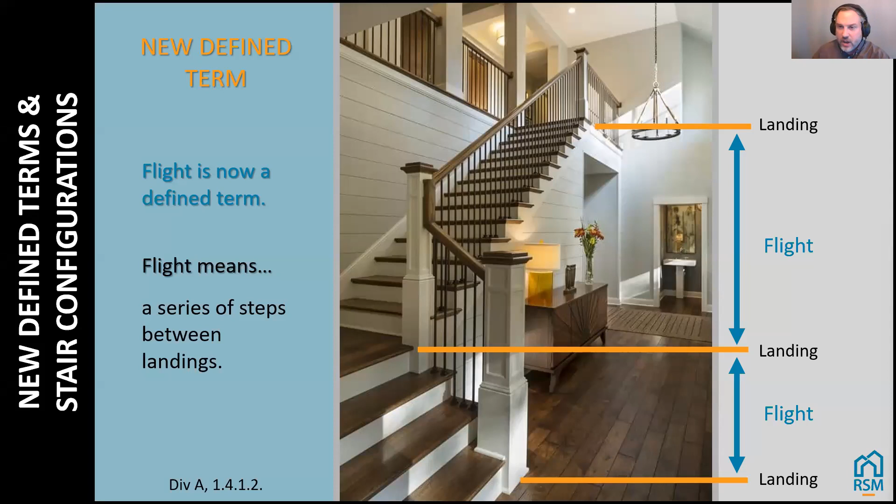So this was a really good clarification in the building code that talks about what is a flight. It clarifies that when we're dealing with these specific flights, we don't have to have uniformity through this entire stair system - it has to be to the flight. So that was a good change, and now we have a defined term for flight.

So what are these new terms? Well, flight is now a defined term, so it hasn't really changed, it's just given us some clarification. We now have a new defined term.

We don't use the word angled tread anymore. It's gone. We used to use that word, so I've got to throw that out. And now we use tapered tread. The building code no longer uses angled tread, it now has this term called tapered tread, and it does have a definition: it is a tread with a non-parallel edge that increases or decreases over its run uniformly over its width.

So in this case, when you're using a circular type stair, you're going to need to use tapered treads to achieve that - essentially you have a smaller run on the inside than you have on the outside. So we no longer call that an angled tread, we now call it a tapered tread.

One of the things you'll notice is that it has to be a uniform change over its width. So I know we love live edge stairs and they look beautiful, but if you tried to use a live edge stair, you would have a difference of width, but it wouldn't be uniform - it's going in and out. In this case, the code is clear: it has to decrease uniformly over its width. That's a tapered tread.

The other thing it's done is set up different configurations of what stairs shall consist of. Previously, the code talked about a straight run. Well, now it talks about a straight flight, which brings it in line with that defined term of a flight. So if you had the first diagram with two flights, your first configuration would be a straight flight.

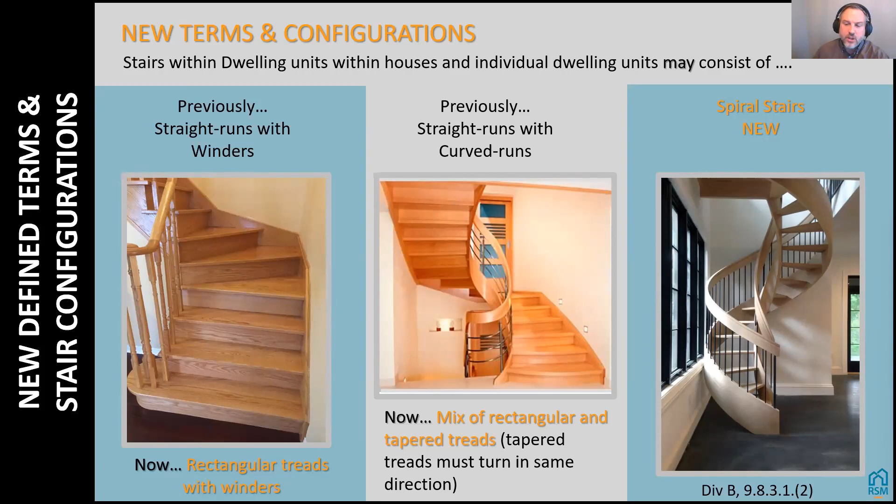Well, now it has changed. It says you can now use a mix of rectangular and tapered treads, but the tapered treads must turn in the same direction. So we've all been doing this in the past, we're just changing our terminology on how we talk about a stair when we're really dealing with code compliance. And a dwelling unit is now permitted to have a spiral stair, but there are some restrictions on that particular type of stair. So those have had some configuration changes with regards to the names.

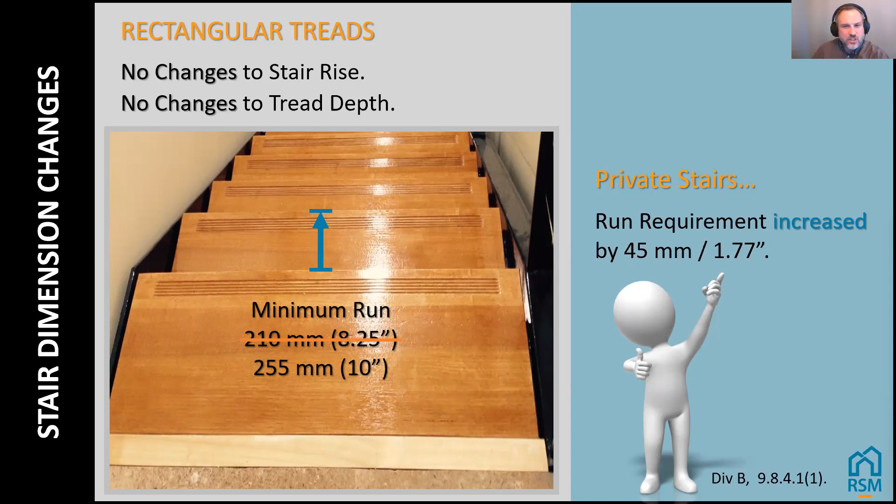Now, there's been no changes to the stair rise. There's been no specific changes to tread depth, but I'd like to bring up another slide just to clarify it, because I know a lot of times people get a little bit confused on the requirements of the code.

So we could have an 11-inch tread, which is probably what most stairs will have these days, because most stair configurations love to have that 1-inch stair nosing. But again, the 10-inch is the distance between nosing to nosing. The nosing requirement of 1 inch has not changed, so you want to make sure you're adding this additional 1.77 inches to any type of stair you're typically doing. But if you have a stair that does not have a nosing, it would be slightly different. So make sure that when you're talking about full tread depth, you understand the requirements of a nosing.

So those were our rectangular treads. Very easy. Well, what happens when we get our tapered treads? We don't call it an angled tread anymore, we call it a tapered tread. Now on tapered treads, it's the same thing: no stair rise changes, the tread depth is the same, and no changes to the minimum run, which is 150 millimeters. However, run's the same as a rectangular tread, but you measure it 300 millimeters or 12 inches from the inside of the handrail.

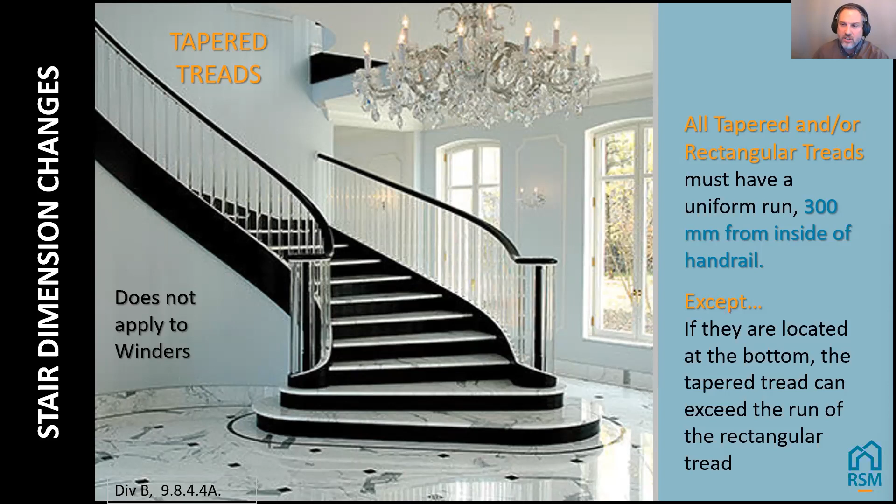Added basically a slide to say what winders was before is what winders is again. They did not touch the requirements of winders in the building code, so we still have that maximum 3 steps, blah blah blah blah. Same sort of information with regards to winders.

So those are big changes, especially that 10 inches. That's a huge change that you want to make sure you're dealing with. So designers, get your stairs designed, change your applicable standard notes on your drawings, and of course make sure you've provided enough room on the floor plate for this new stair.

There were also some changes with regards to landings, which is also going to increase the size of your floor plate, depending on the configuration of stair you're doing. Building code previously had a table that talked about how the angle of the stair changed and applied to the size of the landing. But essentially what the building code has done now is eliminate it and make one rule. If you have a 90-degree change at the landing, it's the same as before. This is really the rule they're following: it has to be the minimum width of the stair, what it needs to be. So bang, 90-degree change, same as it was before.

However, prior to this, on a straight landing, you were able to reduce it to like 860 on an interior stair, but not anymore. Building code requires that 1100, the lesser of the minimum width, or 1100 for that particular landing. And that does also apply to the 90-degree. We've got to ensure we have a larger landing, so they've increased the sizes of the landings. We don't get too many of these straight landings in the standard typical house, so you may not see this as applicable unless you're dealing with 9, 10, 11, 12-foot ceilings.

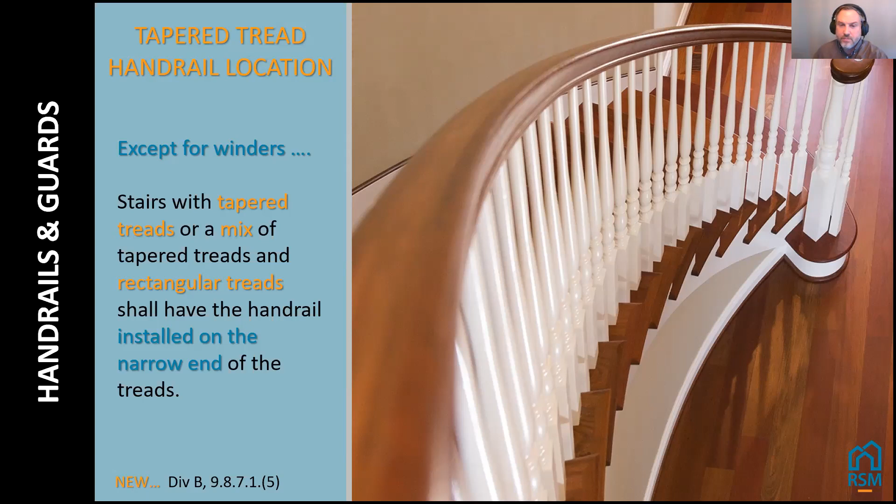One big change we've always been used to is that the height of the handrail has now been changed. If you're with a stair company, you're probably pretty excited about this, because we always had the guard height at 1,070 millimeters, but the handrail couldn't be any higher than 965. That made for some interesting details with regards to installing a handrail that's also a guard—you usually had that gooseneck at the top—but now the building code has changed so that a handrail can go as high as 1,070.

Of course, the minimum has not changed. So this gives you a little more flexibility now in using the guard as a handrail, without massive changes in height due to the configuration. Of course, this doesn't apply to spiral stairs, which have their own requirements, but this will apply to most stairs we're going to be dealing with.

Small change, but one that might be a pain. We're all used to the 2 inches, or 50 millimeters, between the inside of a handrail and the surface of a wall. Well, the code has changed to 60 millimeters if the surface is rough or abrasive.

So again, we all love gray areas. I think the idea here is, what is rough? Is a brick wall rough? I'd say yes. Is a stucco wall rough? I'd say yes. But sometimes we get situations where it's unclear what counts as rough.

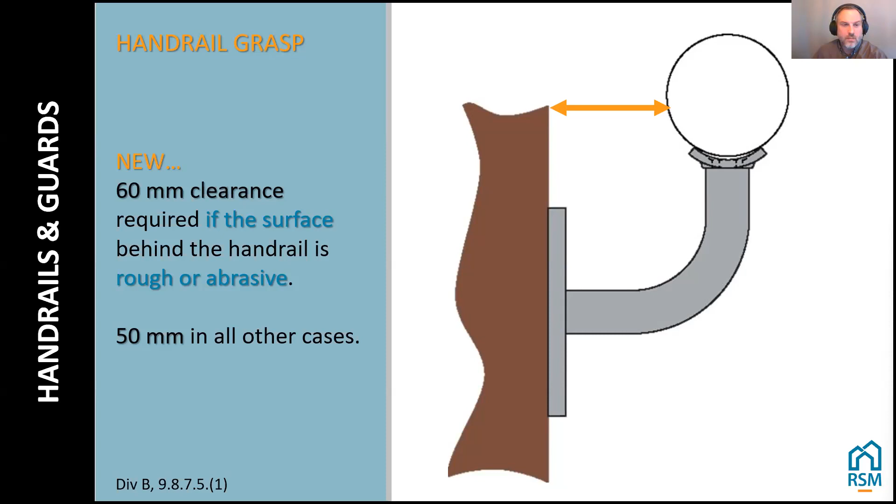Previously in the building code, it wasn't very clear that the prescriptive requirements for how to attach a handrail were also applicable to the exterior of a building. When we have handrails inside the building, the code is very clear on where you have the attachment points, where you attach it, what type of screws—all that was in the building code. But it didn't clarify that it was for exterior, so there were some discrepancies—some were enforcing it, some were not. But the code has now made it very clear that the attachment requirements for handrails are also applicable to exterior handrails.

This was an interesting change that was completely revoked from the building code. It talked about how, if you had a stair with more than 2 risers, the sides of the stair, ramp, or landing around the stairwell shall be protected by guards if not protected by a wall. The idea here is, wait a minute, isn't 600 millimeters typically the height that requires a guard—but this needs it at 400? It just doesn't seem right. So the building code has taken this particular provision out. It must not have been in the national building code. So again, we're just following that 600 millimeter threshold now—we don't have this special provision that forces it on a stair that's more than 400 millimeters or 2 risers.

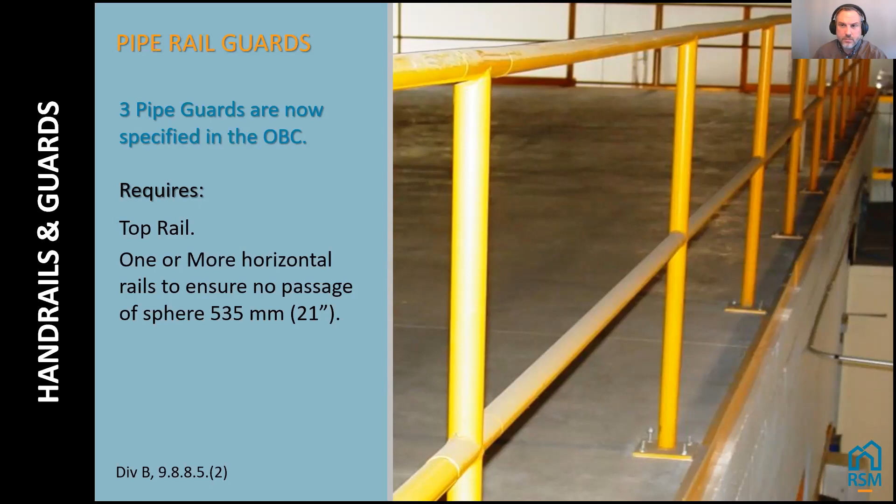So that's the particular presentation that I have. That's all the changes that are in Part 9 of the building code. We've talked about the new defined terms—why, what, when, and where—stair dimension changes, landings, handrails, and guards.

We do our best here at RSM Building Consultants to provide you the best information that we know how, and we do that by providing you our opinions on these particular code provisions. But make sure you double check with your municipality as you start working through these issues, because the chief building official in the municipality is the authority having jurisdiction. You want to make sure that anything you're discussing with them is also on the up and up.

Do we have any questions on some of these provisions that we've talked about today? You see one in the Q&A session there, Gerald. I think I was going to have Tara moderate some of the questions here for us, so if Tara's still around, then...

Yeah, I see there's one on here—are we able to get a copy of this presentation? For sure, I have a PDF copy of this particular presentation. I'll be sending it off to Dieter and his team, and I'm sure they'll be able to share this with you, because we went through it a little bit fast, step by step. You probably want to sit down and look over these changes, so we'll make sure you get a copy for your notes.

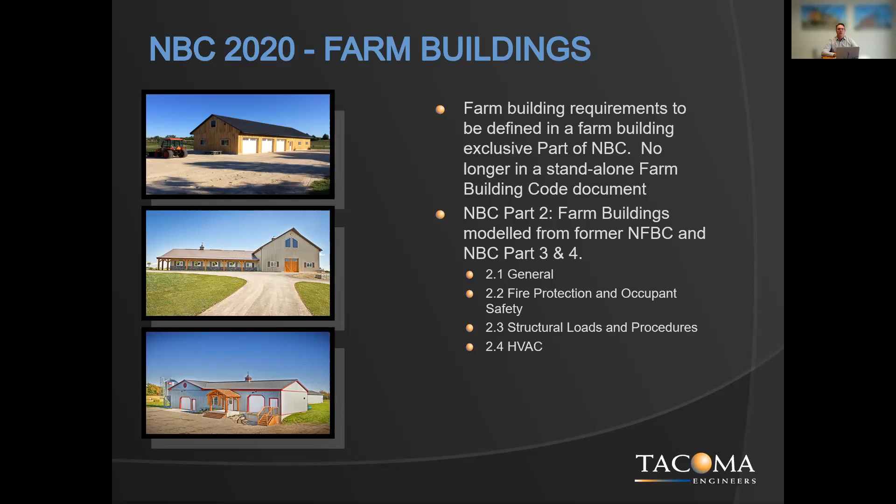Within Part 2, it will be broken into 4 parts: a general section, a section on fire protection and occupant safety very much like Part 3, a section on structural loads and procedures very much like Part 4, and HVAC very much like Part 6. I believe that's correct - not my specific area of expertise, but certainly this new Part 2 was modeled after the former National Farm Building Code, plus NBC Part 3 and Part 4.

One of the prime differences between the NBC general requirements and those for farm buildings is that only the safety objectives apply to farm buildings - the property objectives do not apply. As every single clause in the new code was written, drafted, and reviewed, a reference back to objectives and function statements was absolutely required. So you will see some changes as we move forward here that are specific and changed because of the objective statements.

Going through NBC Part 2, very much like the old code, this only applies to farm buildings of low human occupancy and those located on farmland, which means that greenhouses or other farm structures in an urban environment are not farm buildings. Also, industrial facilities located on farmland are not farm buildings - they need to look like farm buildings and operate as farm buildings.

Within those farm buildings, they're broken down into four categories or divisions. The G1 high hazard farm buildings, G2 a standard farm building, G3 specific to greenhouses, and G4 may be a bit of an oxymoron, but it's a building with no human occupancy. That really gets into some of the storage facilities that are typical on farms.

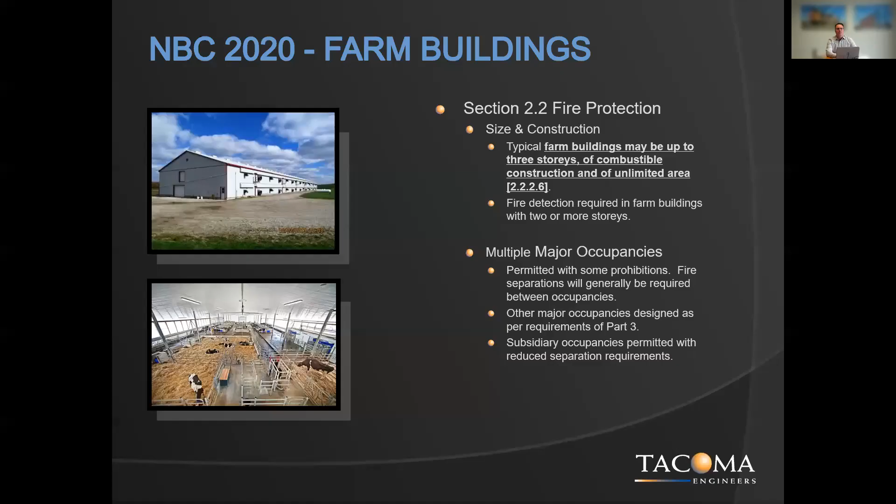In terms of fire protection, as we alluded to earlier, fire department access is required at all farm buildings, as is emergency lighting with backup power. Exits also now need to be clearly identified or signed, and overhead doors are no longer allowed as defined exits.

Very much similar to previous editions of the Farm Building Code, fire separations are required between many high hazard areas. But in the attics, the spacing of attic fire blocks is no longer based on a linear measure, but areas.

We then also will get into ventilation requirements, and one contentious issue, and may be subject to revision moving forward, is that all of the spatial separation requirements have been removed from the code because the only objective statements that could be applied to those were the property and not the safety. That is open for debate, I recognize, and I can tell you that there are probably some changes coming in the future.

In terms of structural design, very much as per the previous codes, but it's been greatly simplified. The underlying statement is that farms are designed as per Part 4, with the exception of the specific requirements listed here and throughout the code.

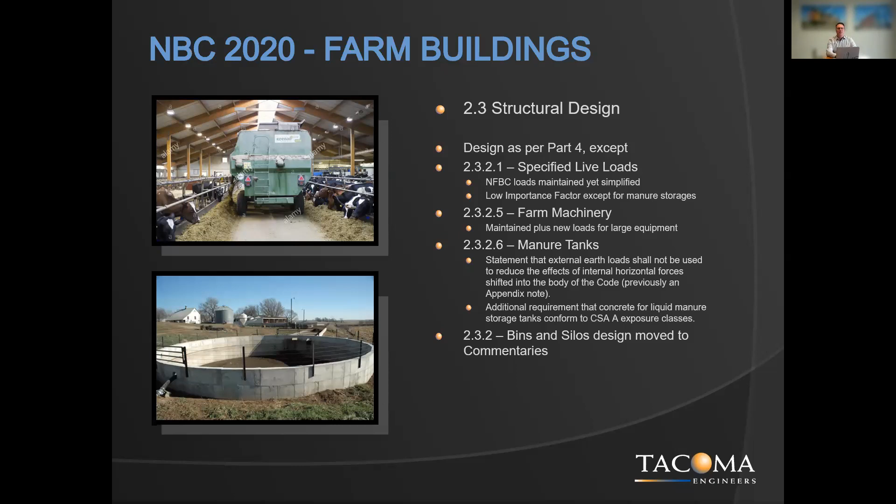Increased loads for large farm machinery, discussions about manure tanks, bins and silos have been removed out into the structural commentary. I recognize I'm going through this very quickly. It's a bit of a repeat for many of you. I'm happy to answer questions at any time as we move forward.

The concept of snow design has been maintained from the previous version of the codes, but it has moved now to a 50-year return period, and the system factor for trusses has been removed. Essentially, that means we're going to be seeing trusses installed at 2 feet on center rather than 4 feet on center. That came directly from the Canadian Standards Association recommendation.

There's also been some updates about roof snow loads on greenhouses, a slight increase, but also a requirement that there's a minimum heating that can maintain 10 degrees centigrade in the building with full backup power.

The wind loads are one of the biggest structural changes. We're going from a 1 in 10 year to a 1 in 50 year return period. That's about a 50% increase in the wind load that the farm buildings need to resist. That's a reflection of climate change, also some localized failures we've seen with some of the extreme weather on wind.

Seismic is another item that has bounced back and forth many, many times. Some advocated that the status quo of no seismic design apply to farm buildings. Others wanted all buildings subject to seismic design. In the end, a hybrid solution was developed, that the default is that seismic design is required, but there's 2 major exceptions.

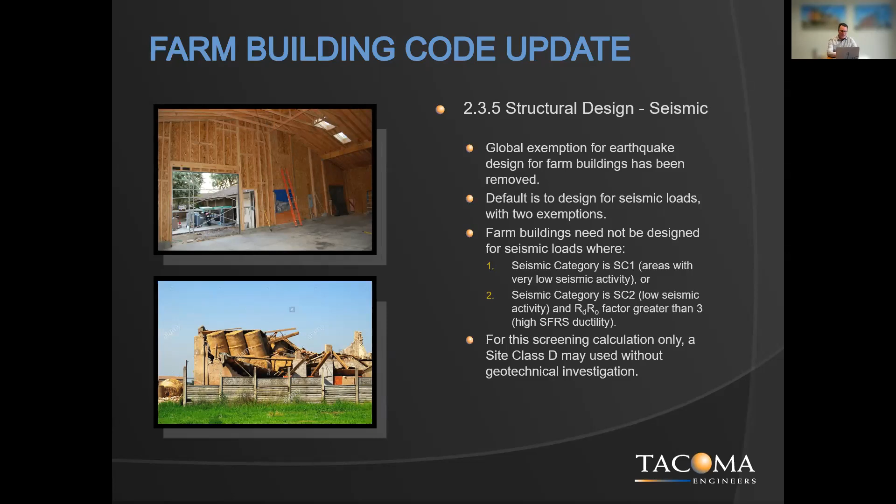Final few things on structural design. The importance factor will be maintained at 0.8, recognizing low human occupancy, but allowable stress design really hasn't been used much since the 90s. It has actually been now removed from code. Also, the old National Farm Building Code had specific load testing criteria.

That has been removed, and any load testing required needs to be done as per the CSA standards. One of the last items here is ventilation. As I mentioned, high hazard farm buildings are a special category, and any barn with manure storage below the floor is considered a high hazard farm building. But with this requirement, 2.4 on ventilation introduced, those buildings actually get their criteria reduced down to what's equivalent to a regular farm building. So there will be mandated 2 air exchanges per hour.

All of those liquid manure storages will need to be ventilated with the appropriate design criteria. Silos, feed bunks, those items have been removed specifically from the National Building Code and introduced into the structural commentaries. And many of those, in fact, now reference American standards because unfortunately, with cutbacks, there is little to no original research being done in Canada. So it was best to rely on the American standards that are updated on a regular basis.

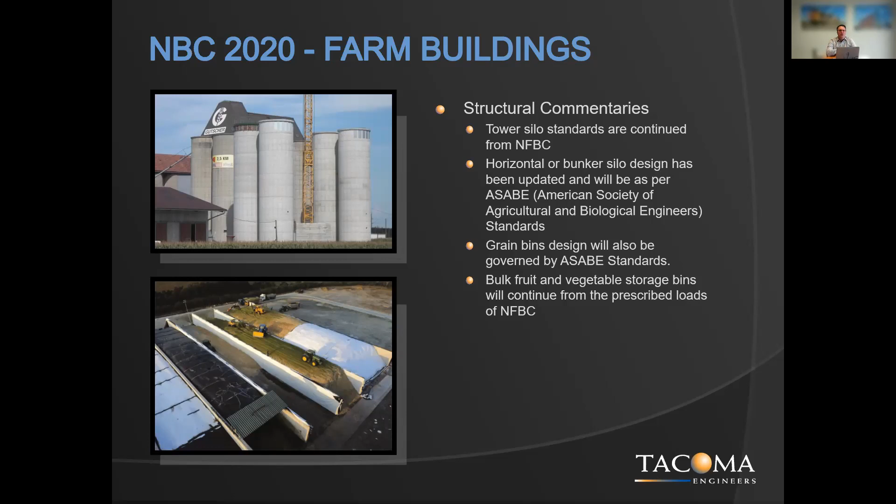That was the building code. Now to the fire code. Most people on this, yes. Sorry, we do have a question in the Q&A, so if we could just maybe look at that before we move along.

The question comes from Mark Diebel. Will the change to farm buildings being designed to Part 4 mean that all farm buildings, regardless of size, will require a P-Eng stamp? My apologies, it may have been in the notes earlier. This only applies to large farm buildings, and that definition uses the definition from the balance of the code, essentially 600 square meters. I will get to small farm buildings as a small comment at the end, but all my previous comments were with respect to large farm buildings, 600 square meters and bigger.

And we had one other question pop up here from Jonathan DeWord. Will there be changes to the standards for stave silos? All of the silo design will be as per the ASABE standards. So yes, there will be, recognizing that these are generally designed by the manufacturers with specialty engineers. They will be, and most of them actually have been relying on the ASABE standards. So I don't expect to see significant changes, but the new standards will be the American standards.

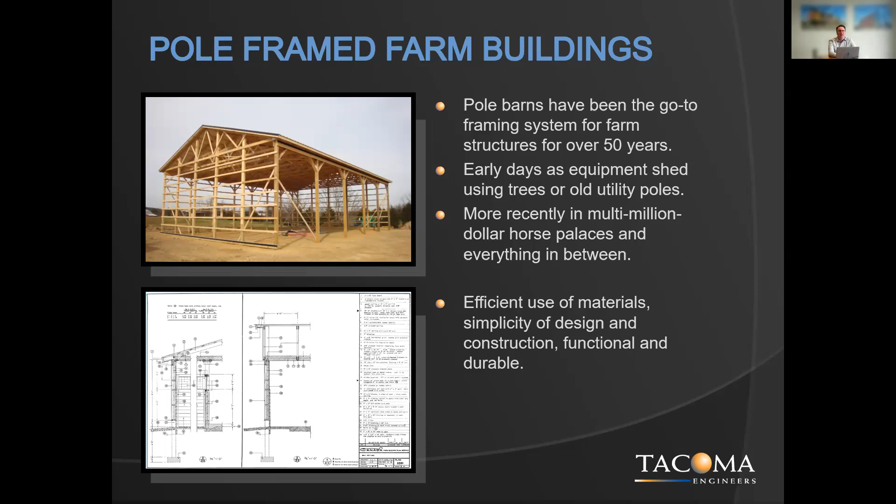Really, the pole frame building has been very well received. It represents a really efficient use of materials, simplicity of design and construction, functionality, and there was always an assumption of high durability. The drawing at the bottom was a Canada Plan Service drawing from the early 70s, and with the exception of a few nuanced changes, that building design is as applicable today as it was in 1972 when Canada Plan Service put that drawing out there. Unfortunately, in the last few years, there have been increasing concerns about the durability of wood posts.

We've had stories of posts in particular rotting out sooner than expected. This was an article in Better Farming magazine by Becky Dumais in February, distributed to about 40,000 members of the Ontario Federation of Agriculture. So I think the message is getting out there, questioning some of the durability issues. It's a subject that all of us need to address, be it builders, designers, specifiers, and building officials.

Much of this started after a local builder reached out to me and the industry associations. He was called out to a farm where the farmer assumed two posts in the corner were subject to frost jacking and had lifted, binding all the doors. On further investigation, it was found that corner wasn't heaving, it was the balance of the posts on the barn that had settled two inches. When digging them up, this is what he found: complete rot through on many of the posts after only 12 years. In this case, these 6x8 posts had full penetration decay.

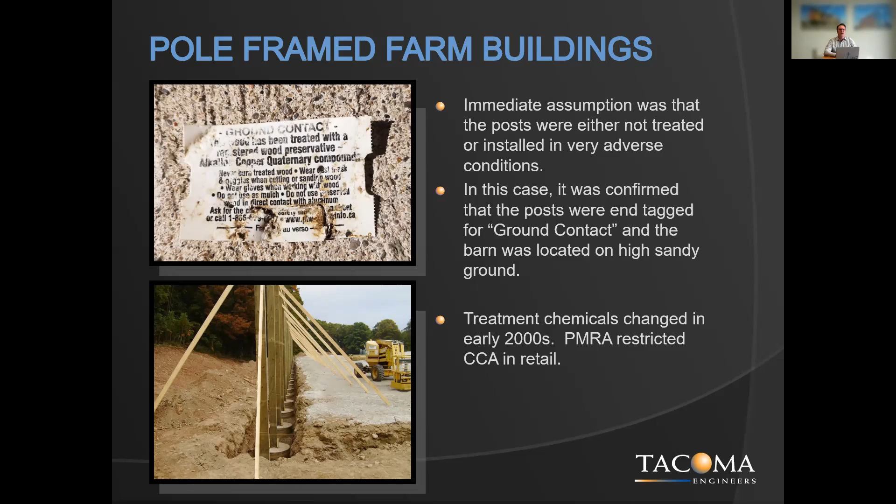What we did identify is that the treatments or chemicals changed in the early 2000s, and the Pest Management Regulatory Agency restricted the use of CCA treatment chemicals in the retail industry.

We've had many discussions with the industry, and what became clear is there is a very distinct difference between residential and commercial wood products. Pressure treated wood sold at local retailers is for residential applications such as decks, fences, and pergolas. For commercial use, such as barns, pressure treated wood must be purchased through special order, either at the retail location or directly from the treating facility. The posts are not the same.

Unfortunately, we identified this very important distinction, but found that very few specifiers, very few suppliers were aware of it. We reached out to local lumber yards, and the vast majority said no, there's no difference—this is pressure treated, and look, the end tag says it's for use in ground contact.

Also, going through the regulations, CSA guidelines, industry guidelines and regulations, we found that many of the terms used are ambiguous at best.

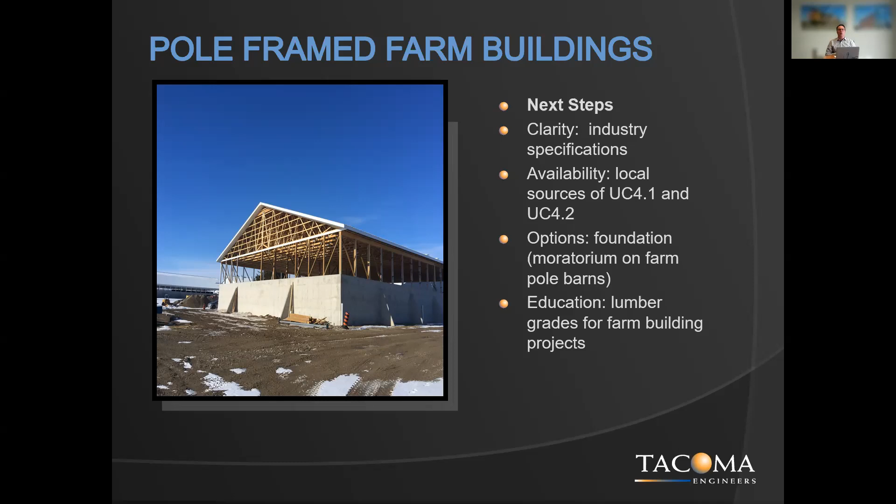Okay, just going one more on, then the final comment here - really the education about lumber grades for farm buildings is absolutely imperative. I know there are more presentations coming. This presentation here, again, is to share some of those items and to at least make everyone aware of the conditions that are out there.

The fact that we are seeing premature deterioration of poles, which for every reason should look like they would be successful, but they're not. There has not been research done, to the best of my knowledge, with the change in chemicals that was in the early 2000s. But talking with industry professionals, including those in the treatment industry, all believe that if the posts were still treated with CCA chemicals, they would be fine and were fine in the past.

But the new chemicals are not as robust, and therefore it's absolutely imperative that we get the commercial grade posts that have the higher retention volumes and the deeper penetration.

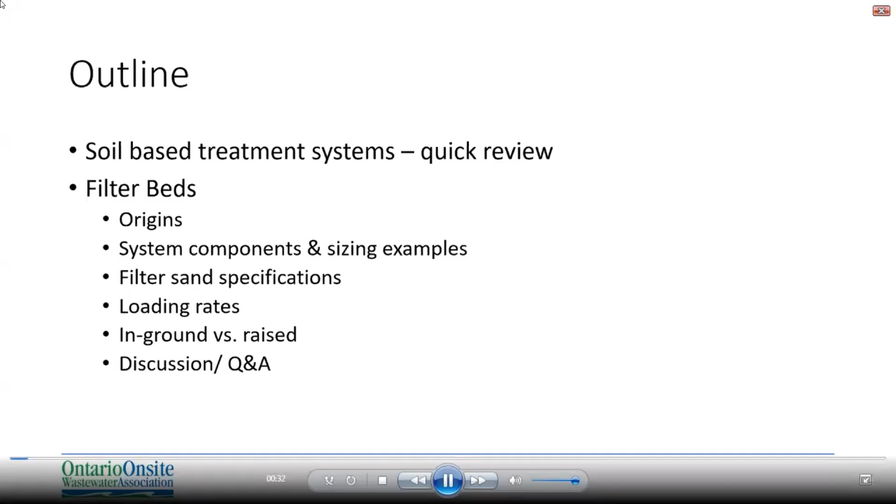Presented by the Ontario On-Site Wastewater Association. This presentation will discuss the use of filter beds. First, we will do a quick review of soil-based treatment systems. Then we'll talk about filter beds, their origins, the system components, and some examples of sizing for a filter bed. We'll talk about the filter sand specifications, loading rates, in-ground versus raised filter beds, and there will be time at the end for a discussion and question and answer period.

With a standard septic tank and leaching bed system, the most important part of the system is the leaching bed, where approximately 70% of the treatment occurs. The leaching bed provides two primary functions: the treatment of the effluent through the soil, and providing a method of absorbing the liquid into the underlying and surrounding soils without breakout. In Ontario, we have different types of leaching beds available to us.

There's the conventional absorption trench bed, we have filter beds, and we also have Type A, Type B dispersal beds, and shallow-buried trenches, with these three being permitted to be used only in conjunction with an approved treatment unit. We also have combined treatment and dispersal systems, which are not currently in the building code, but are authorized through individual Building Materials Evaluation Commission authorizations.

The leaching bed provides treatment through a combination of physical, biological, and chemical means. In physical treatment, we get physical filtration of the effluent through the soil particles. Biological treatment occurs because microbes in the biomat and the soil consume the organics and the nutrients and assist with pathogen removal. We get chemical reactions between the constituents in the effluent and the soil, depending on the type of soil. The other primary function of the leaching bed is to absorb the effluent into the underlying and surrounding soil, so the leaching bed has to have sufficient area to allow this to occur.

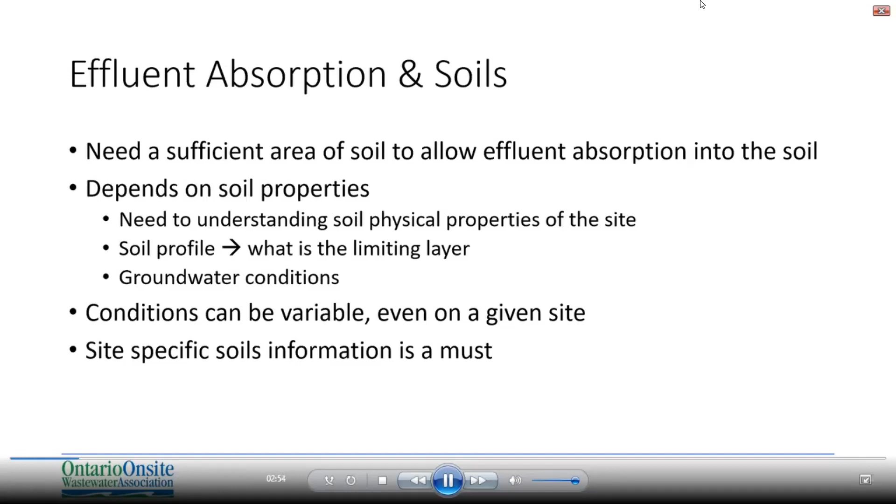In the design of any leaching bed system, it's important to understand the soil profile. We need to understand how the effluent is going to move through the soil when discharged to the bed. So we need to look at the soil profile.

This is a vertical section through the subsoil, and it shows the different thickness and sequence of the soil layers. This is going to be unique for each site, and you have to consider these different layers. What is going to be the limiting layer? What is going to be the direction that the effluent will move through the soil? How will the effluent move through the different layers? And you have to consider both vertical and horizontal movement.

The filter bed is a very popular type of leaching bed used in Ontario. So let's discuss the origins of this type of leaching bed. The filter bed was studied in the 1970s by the Ministry of the Environment by a fellow named Chowdhury. The original purpose of this was to look at a sand filter as an alternative to conventional subsurface trenches. This excerpt comes from the report by Chowdhury on his studies. In the introduction it says, the sand filter is considered to be an efficient device for the treatment of household sewage in areas where conventional subsurface disposal methods are impractical.

This study looked at under-drained sand filters, and they looked at 5 different grades of filter sand, from a very fine sand to a pea gravel. They were primarily studying the treatment function of this sand filter and how the different grades of sand performed. The Chowdhury studies looked at different gradations of sand and gravel, and they concluded that a 750 millimeter depth under-drained sand filter would provide effective treatment for BOD, TSS, and some coliform removal. They did find that the finer sands tended to clog more easily, and the coarser gravels didn't provide adequate treatment. That is how they came up with the specifications for filter sand.

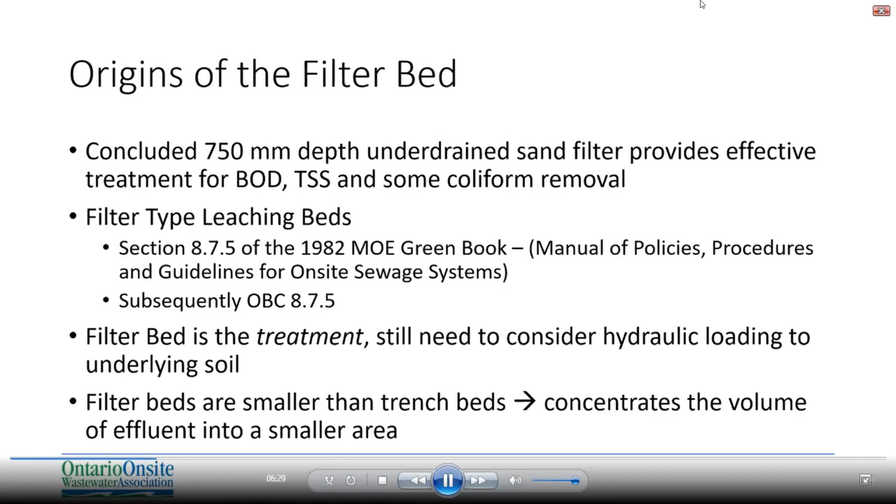This is important when sizing a filter bed and giving consideration to providing adequate treatment and adequate dispersal into the underlying soils. Section 8.7.5 of the Ontario Building Code describes the requirements for filter beds, and there are some size limitations for filter beds.

Because we are concentrating this volume of effluent into a smaller area, there are some limitations to make sure that we're getting proper treatment. Filter beds are permitted to be used up to 5,000 liters a day where the treatment unit is a septic tank, or up to 10,000 liters a day if a level 2, 3, or 4 treatment unit is used in conjunction with the filter bed.

There's also a loading requirement that the filter surface must be at least 10 square meters but not exceed 50 square meters. Again, this is important to remember that the filter bed is providing treatment. If we have too large of a filter, it may not get good distribution and good treatment through that filter.

When considering the design of a filter bed, there are 3 main components to consider in the sizing. You have your distribution layer, constructed of either a stone and pipe or chambers, which will distribute the effluent over the surface of the sand filter. The distribution layer would be sized based on an area of Q over 75 if your design flow is less than or equal to 3,000 liters a day.

Or Q over 50 for a design flow greater than 3,000 liters a day.

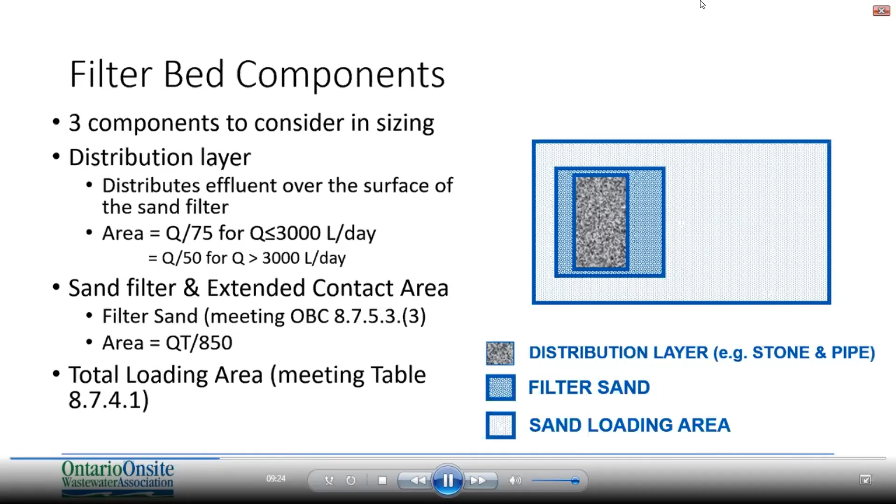The third component of the filter bed is going to be your total loading area. We have to look at table 8741 for any fill-based leaching bed system, and a filter bed is almost always going to be a fill-based system. You have to have a loading area that meets the loading requirements in that table.

This drawing just shows a typical cross-section through a raised filter bed. In this section, you can see the different components of the filter bed. You have your distribution layer, which in this case is a stone and pipe layer that distributes the effluent over the surface of the sand filter.

You have your filter sand, which extends to a depth of 750 millimeters minimum thickness below the distribution layer, and the base of that filter sand extends to cover the area that is calculated by that QT over 850 relationship.

And then you have your total loading area. This is calculated based on the loading rate tables in 8741 of the code, and that provides your total base contact area between the imported material of the filter bed and the underlying soil material.

That loading area can encompass your side slopes and your mantle, so your extended 15-meter sand mantle that goes downstream of your distribution piping can be part of your total loading area.

You can see in this sketch that we've shown that the sand that's used for the loading area does not necessarily need to be filter sand, but it can be so long as you have your minimum filter sand area that meets the minimum QT over 850 size requirement. You could use a different sand fill to make up the rest of that loading area.

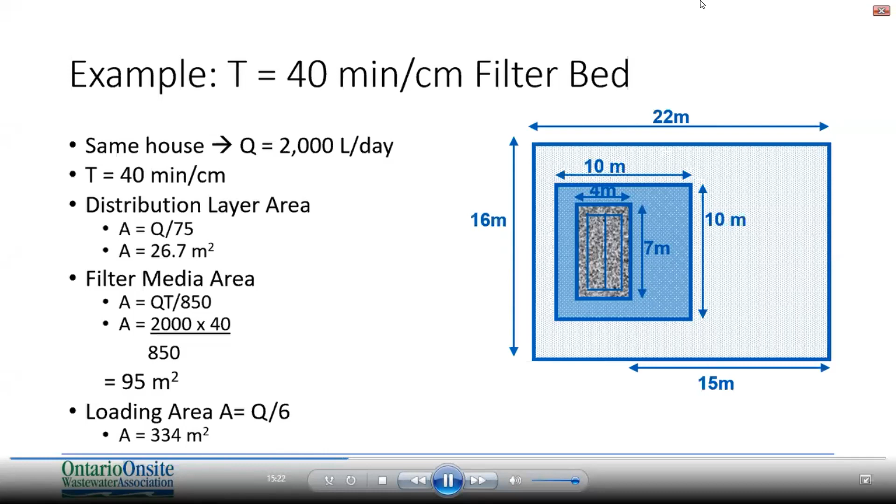One of the things we hear as industry practitioners is that there's a lot of inconsistency in how filter beds are sized, constructed, or permitted. So a number of years ago, we decided to prepare a best practice document that looks at filter beds and provides guidance on the proper way to design and install these systems. We polled our membership and asked them to provide what they see as the key issues for filter beds, and we put that together into this best practice document, which can be found on our website, www.oowa.org.

When we were putting together the best practice document, we polled our membership and generated a list of the most common issues and inconsistencies with the application of filter beds. This is what we found: filter sand compliance with the specifications in the building code, even distribution of effluent over the surface of the filter, loading rates and proper application of the loading rates in Table 8741 of the code, the 75% rule and its interpretation and application, in-ground beds being constructed in unsuitable soils causing the bathtub effect, incorrect sizing of filter beds, life expectancy issues, and proper backfilling materials and practices.

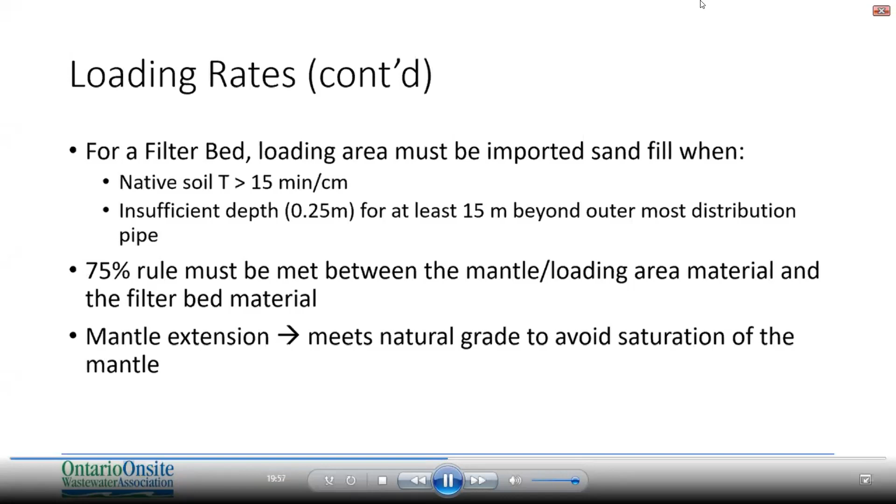imported sand fill material to provide the rest of that loading area. When we're looking at the total area, we have to consider the 75% rule. This rule must be met between any of the mantle sand or loading area sand and the filter bed material. So if we're not going to use the same filter sand for the entire bed, if we're going to use a different sand fill, which perhaps in some areas this is going to be more cost effective, we have to look at the 75% rule to make sure that the difference between those two materials is not too great. We also have to look at the mantle extension, so meeting natural grade to avoid saturation of the mantle.

The 75% rule is described in 8742 of the building code, and it applies to all fill-based leaching beds, so both trench beds and filter beds. And 8742 sentence 2 describes the 75% rule, which if we reword it a little more clearly, it's essentially saying that the T time of any leaching bed fill material that's used in the portion of the bed containing the absorption trenches, or in this case, the filter media, shall not be less than 75% of the T time of the soil or leaching bed fill that is used in the mantle.

So what this does is it limits the percolation time to 15 minutes per centimeter or less for the mantle area. So in some sites you can use native soil material as your mantle area if you have sufficient depth and sufficient extent of this material to meet the requirements of 8742. But if the T time of the native material exceeds 15, then imported material is going to be required for a filter bed to ensure that this 75% rule is met. So where the native soils on a site are a T time of 15 minutes per centimeter or less, a

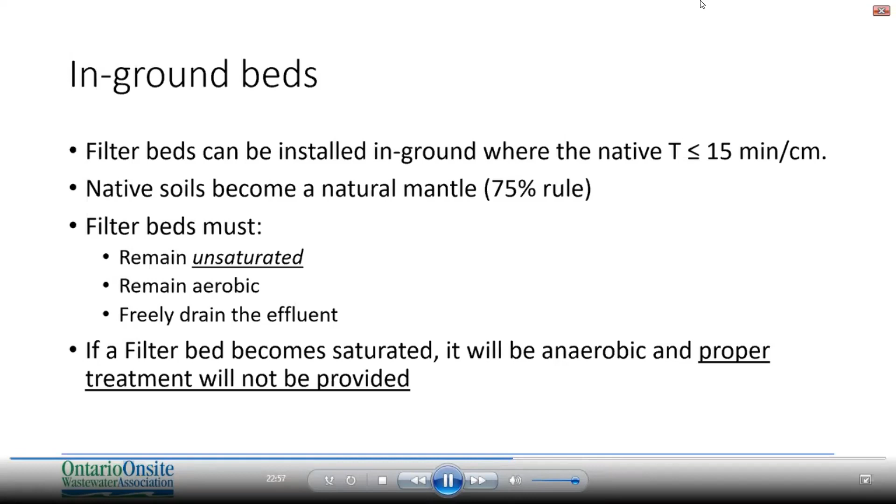So back to the original studies that were conducted by Chowdhury, those under-drained sand filters were freely draining and provided good aerobic conditions, and that's what enables the sand filter to provide proper removal of the pathogens and the BOD and the solids in the effluent. So it's important to make sure that when you're designing and constructing a filter bed, that it's going to remain unsaturated to have proper treatment.

This is an excerpt from the OBC Part 8 course manual for on-site sewage systems 2012, which is based on the 2012 building code. This reinforces what we've been discussing, that the filter bed must be constructed as fully raised when the T time of the native soil exceeds 15 minutes per centimeter.

Sometimes the interpretation of those requirements for the 75% rule and the mantle may not be 100% clear in the code, but this is the interpretation and intent as described in the training manuals: if the site has a T time exceeding 15 minutes per centimeter, you must raise the filter bed and use imported material for that mantle in order to meet the 75% rule. It also keeps that filter bed unsaturated and properly treating the effluent.

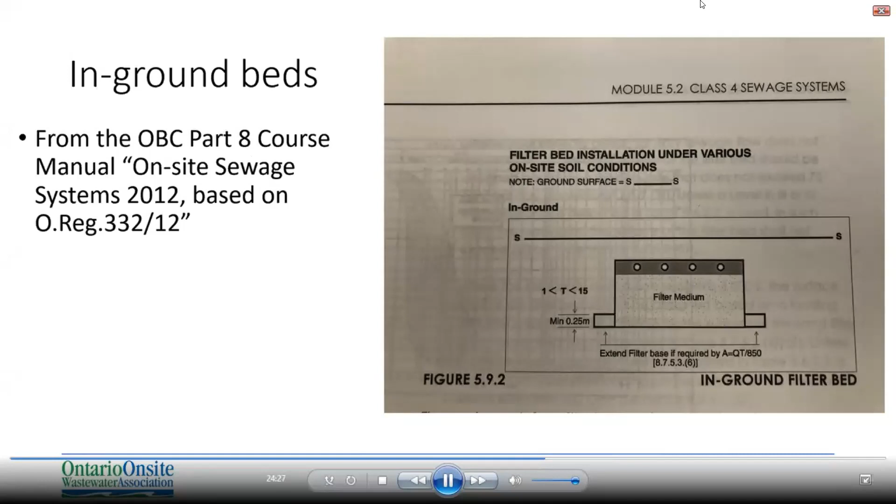This illustration comes from the Part 8 course manual as well, and it shows an in-ground filter bed based on a T time between 1 and 15 minutes per centimeter in the surrounding soil, demonstrating that you can install your filter bed in-ground in these conditions.

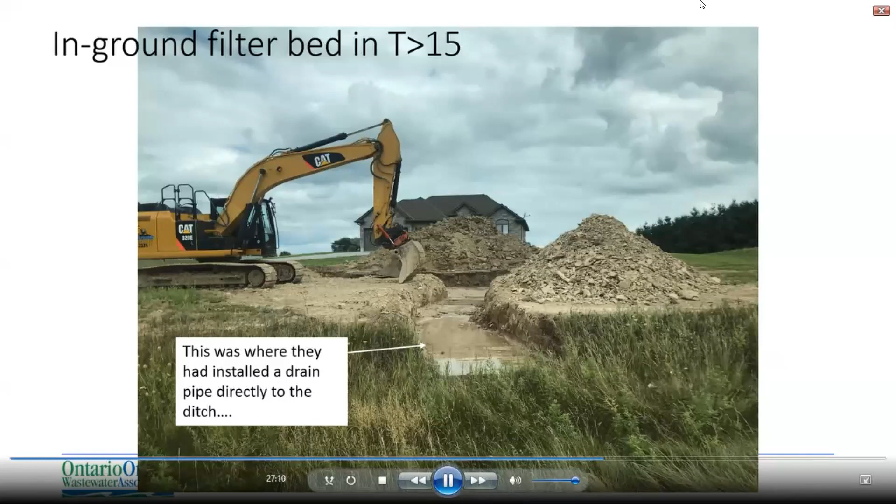Another topic discussed in our OOWA best practice document is proper backfilling practices. Proper backfilling is required for all leaching beds. We need to make sure that leaching beds are able to properly treat and disperse the effluent. So you want to backfill and grade the surface of the bed to make sure there are no surface depressions, and that surface water drains away from the bed so as not to hydraulically overload it. Another important consideration is the depth and material of cover.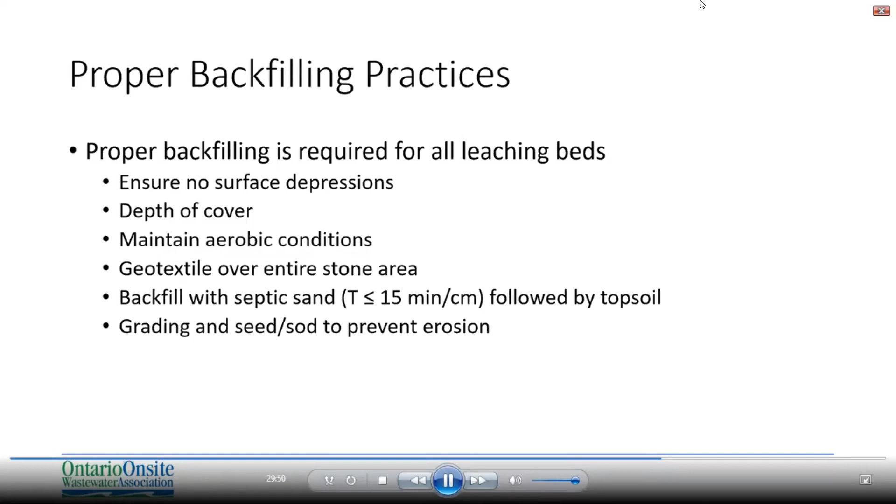Another topic we discuss in our best practice is ensuring you're properly sizing the filter bed. The minimum sand filter area is calculated based on the relationship Q times T over 850, where A is the contact area between the sand filter and the underlying soil, calculated based on your design flow Q and your T, which is the T time of the underlying soil, to a maximum of 50.

It's important to note that the T used in this formula is not the T time of the imported material or the filter sand—that's the leaching bed fill. The T time has to be the T time of the soil, your native underlying material. This is very important to make sure your filter bed is large enough to disperse the effluent over an area the underlying soils can accept.

Filter sand used in a filter bed has to comply with the specifications contained in the building code. Recall when we discussed the original Chowdhury studies in the 1970s, they tested a range of materials—fine sand right through to pea gravel—and found that coarse sand material was the best combination of freely draining but still provided adequate treatment and pathogen removal.

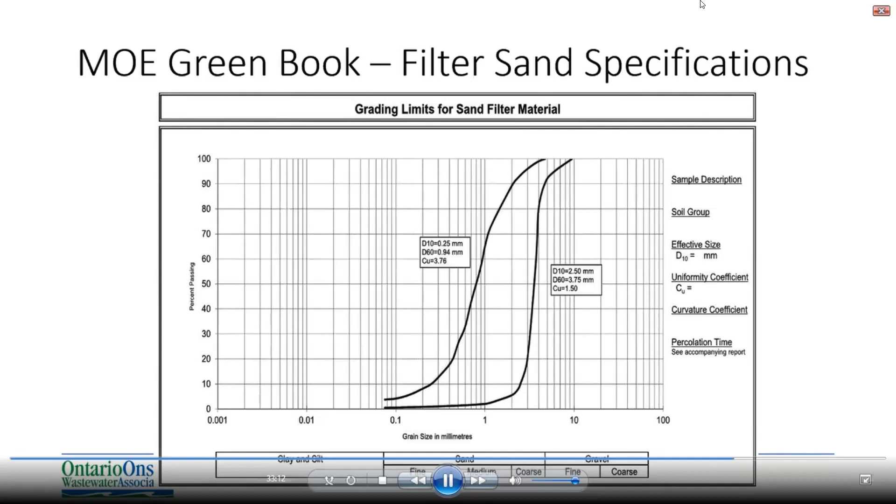Let's look at a couple of graphs that illustrate the specifications for filter sand. This graph is the original filter sand specifications, from the old MOE Green Book in 1982, showing two curves on this graph—the filter sand should fall between those two curves to meet the specifications. If we plot a similar curve based on the specifications in the Ontario Building Code, this shows the limits for filter sand.

On the left, you can see that line corresponds to an effective size of 0.25 millimeters with a uniformity coefficient not less than 3.5. And the right side line corresponds to an effective size of 2.5 millimeters with a uniformity coefficient not greater than 1.5. Overall, the uniformity coefficient cannot be greater than 4.5. So that's what's contained in the building code, and a supplier of filter sand material should provide you with a graph that falls in between those two lines.

In this slide, you can see a photo of 3 different materials, all of which have been considered filter sand by one person or another. On the left, you can see a very visibly coarse stone material. In the center, a coarse-grained sand with some gravel, and on the right, a finer sand material.

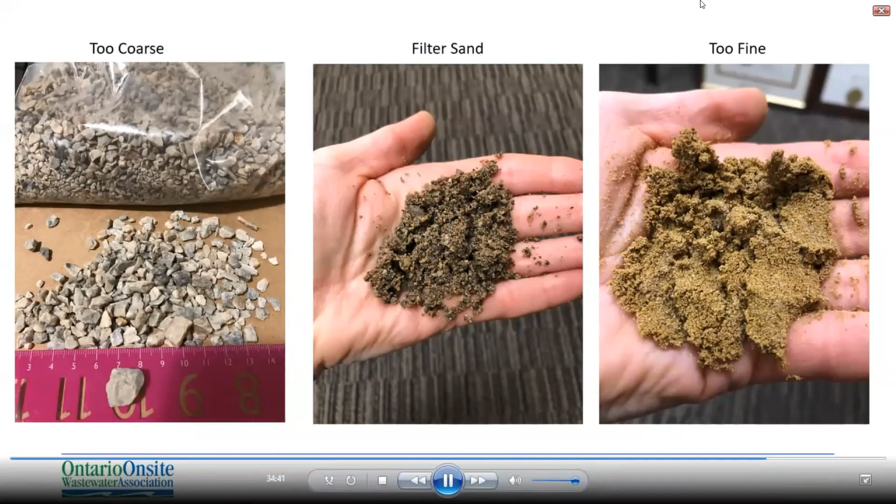Let's take a look at these 3 samples a little more closely. The one in the center is a visibly coarse-grained sand with some gravel, and if we plotted a grain size curve for this sample, it would fall nicely in between the 2 outer limits for the filter sand specs that are in the building code.

If we look at the sample on the left, it's visibly much too coarse. There were some very, very large stone pieces in this sample - pieces that exceeded 10 millimeters in size. And the paperwork that was provided for this material showed a material that met the filter sand specifications. It was on the coarse side of the spectrum, but still within the specifications.

But the material that was delivered to the site did not match the paperwork. So it's very important to make sure that even if you have paperwork that demonstrates a sample meeting the filter sand specifications, the material that's actually delivered to the site matches that paperwork and testing. Because this was a case where we needed a different material because this was just much too coarse, and the effluent is going to move too quickly through this material and not provide adequate treatment.

On the right hand side, you can see a photo of a much finer sand material. It's a nice sand, and this could be used for the mantle, but it wouldn't be adequate as a filter sand because it was just a little bit too fine and it could potentially clog. So it wouldn't meet the specifications for the filter sand, but the one in the middle, that's what typical filter sand will look like.

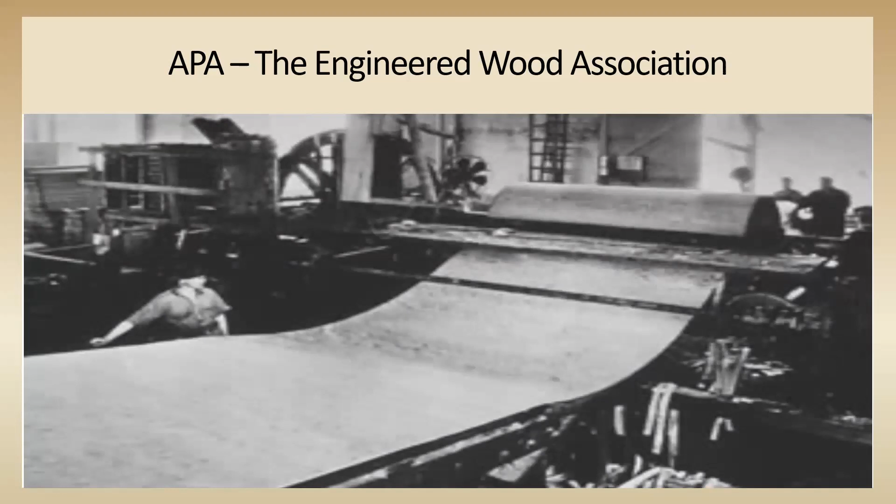I just want to share a couple of old archived photos here. You can see a photo illustrating the strength of the very first engineered wood product, plywood. This was really innovative at the time, back in the 40s. And here again, you see another archived photo, probably in the 40s, probably one of our first member mills. You can see the log being peeled into veneers, which are used to make plywood panels.

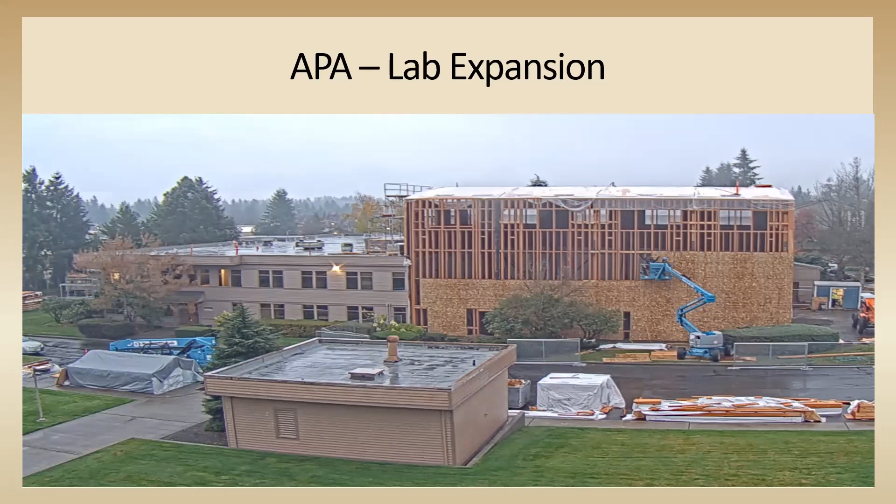Since the list of APA members has expanded along with the types of engineered wood products they produce, we decided we needed to expand our research facility. We just recently upgraded, spending about 5 million dollars to upgrade our research facility, our lab located in Tacoma, Washington. We're really excited, so I'm just going to give you a quick sneak preview. It's already built and in full operation right now.

I just want to go through some of the things we're going to be doing here and tests we're going to be looking at this year. One of them is looking at different types of beam layups, and different types of fasteners in certain locations to help get more use out of these products.

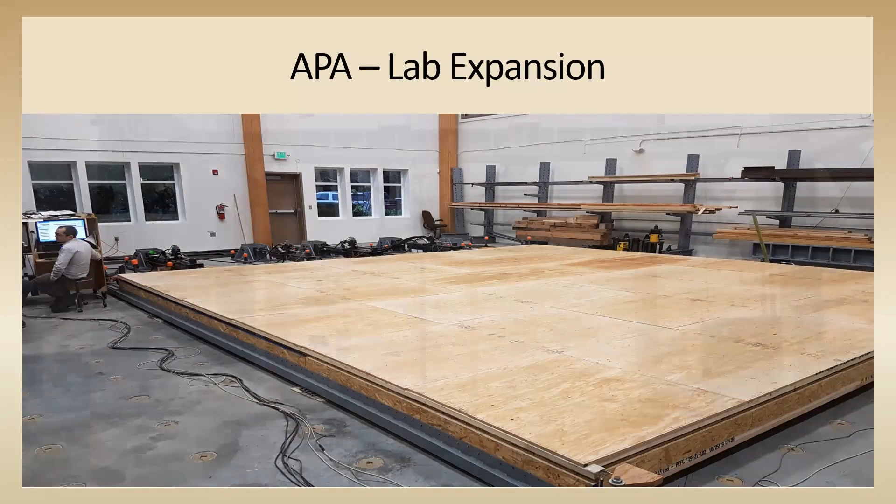We're really excited about being able to do full-scale diaphragm testing now. As you can see here, we've got our actuators, and we're going to actually be looking at cantilevered diaphragms. That's something new, I don't think it's ever been done before, so we're really excited about that this year. And one we've already started our research on is a high-strength shear wall.

We're going to be looking at multiple details and construction methods, where we're going to place these materials in order to get really high strength out of these engineered wood products when used as shear walls. We're really excited about that. There's already some promising news coming out of the initial preliminary studies and tests, so we'll be excited to share that with the industry, hopefully later this year.

There are 4 key divisions at APA. The first, Quality Services Division, provides certification at the mills to ensure the products produced at those mills conform to the product standards as well as APA policies.

We also have a Technical Services Division. They operate out of our research center that we just toured, and they serve as the engineering foundation of our market support and development programs.

Next up, Field Services, that's my division. Full-time engineered wood specialists located across North America - I'm the Canadian rep. We're here to help, to offer advice as far as design, specification, installation of our member products, and to conduct training sessions like we're doing here today.

Finally, our Market Communication Division combines all the information gathered and learned by our other divisions and uses it to create useful tools and publications for professionals in the industry.

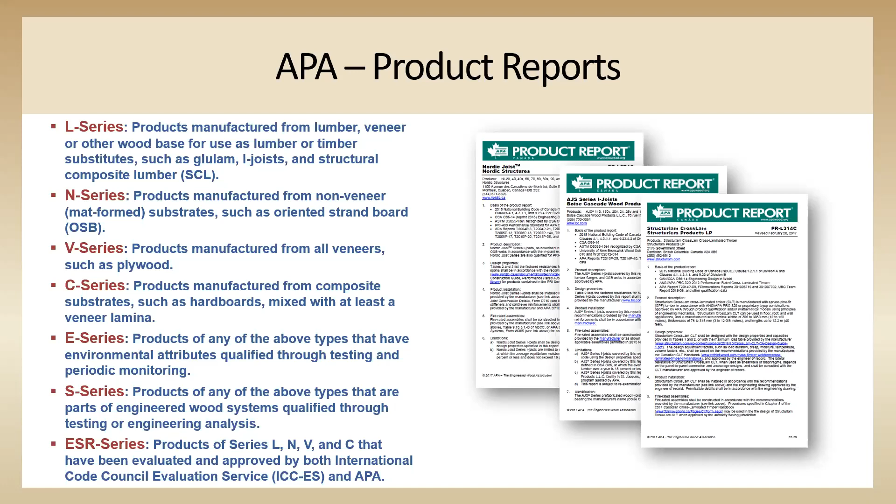These APA product reports signify the product's compliance with the relevant provisions in the model building code. They're also assigned based on product classes, as shown here, with different series available. When you're looking for product reports applicable for the Canadian market, make sure you get the one that's got the little C next to it - that ensures you're getting the right one.

One other section I want to go through quickly is the design and build section of our website. We've broken it down into building types, so you can get residential, commercial, as well as our design solutions tab. We have a lot of publications, close to 700, so we're trying to filter them and make it easier for users looking for specific information. Don't forget about the design and build tab - it might lead you to what you're looking for a little quicker. The design solutions one is really good because it breaks things down into a specific topic.

If you're navigating our website and getting frustrated because you can't find what you're wanting, we do have a help desk that's there to help. I encourage you to reach out to me first - I'm your rep, I'm happy to help. But if I'm not available, we also have a help desk.

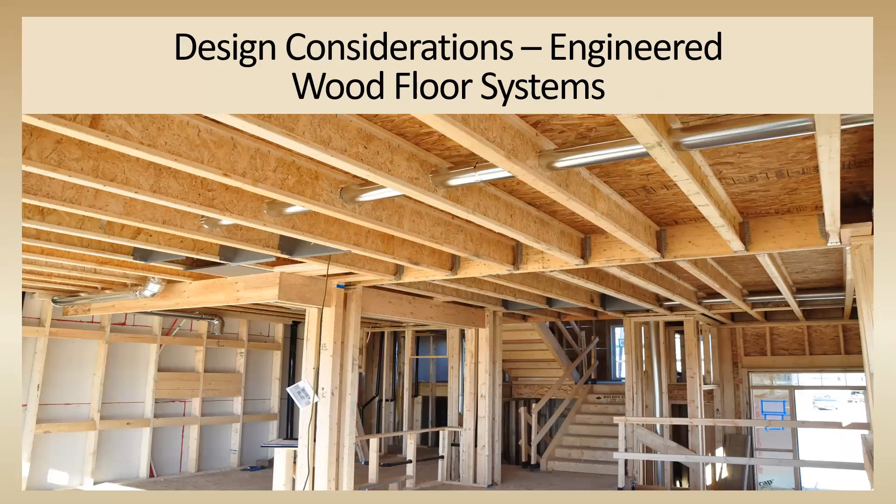During that time, I was able to analyze multiple products under many different conditions and configurations in order to determine the best performing and most cost-effective and labor-effective layouts. So I'm going to share some of the tips and tricks that I've written down over the decade of work that I did as a designer.

We're going to start off with our floors. The first thing you want to do as a designer is identify some of the variables that are going to impact the performance of that floor system. I'm talking about things like your finished floor products—is it going to be marble, ceramic tile, or hardwood? They all have different weights associated with them.

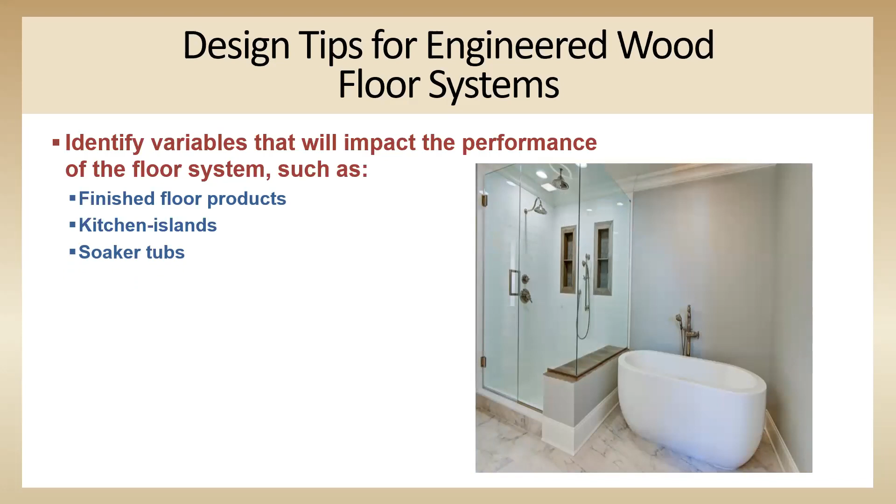Same thing with kitchen islands. We know these are becoming really popular. They're generally located in the middle of a span—usually the kitchen is a big room, so it's a large span, and now we're putting this big, heavy island on top. These are things we need to identify and incorporate into our design. Same thing with soaker tubs—they have the potential to add a lot of extra dead load, and depending on where they're located, it could negatively impact the performance of that floor system.

We also want to look at the depth of our floor, and understand that with different depths of I-joists come different series. A low series 11 7/8, like here we're looking at the PRI series—each I-joist manufacturer has their own series name, like Truss Joist's TJI, Nordic's NI. Here we're looking at the Performance Rated I-joist, that's a family, that's its product standard. So for 11 7/8, a PRI 30 might actually be cheaper than a 9.5 PRI 60. Just understand that as you go up in series, it's going to be more expensive.

We're also going to look at span conditions—I have a slide that digs into this in more detail on the next page, so I'm not going to stress on it right now. We'll also look at deflection criteria, and again I have coming slides that dig into it a bit more.

Finished and unfinished ceilings are going to have a big impact on the performance of that floor. A floor with a finished ceiling is going to be stiffer, stronger, and it's going to vibrate less, as well as whether the subfloor is glued and nailed. Most of the time now you see that most builders are gluing and nailing the subfloor, and this definitely helps with composite action of the floor system and will greatly improve the performance.

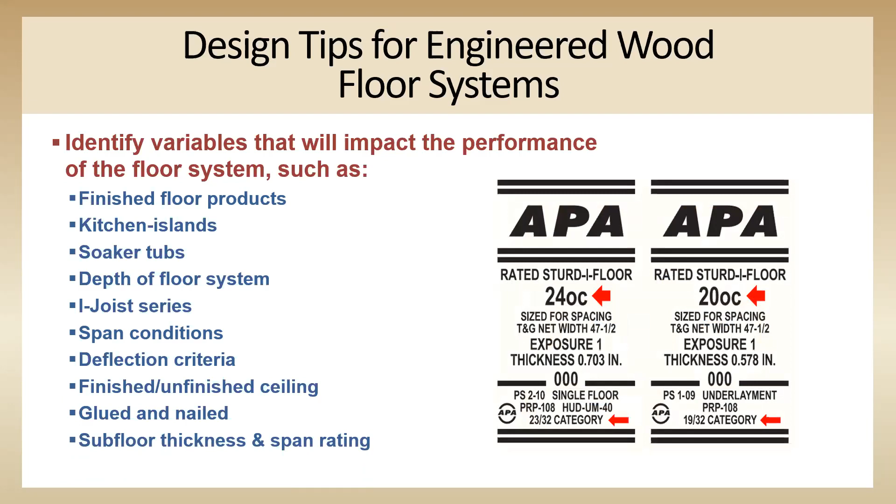And then we're also going to look at our subfloor thicknesses, performance categories, so the thickness of that subfloor, as well as span ratings. Again, we'll dig into that in the coming slides here.

So I promised to talk about span conditions, and I think as far as floor design goes, if there's one thing you take away from this particular part of the session today, it's this. Let's walk through our span conditions.

The first one is a simple span—it has two supports, simple, A, B, that's a simple span. The next up is a continuous span, which is when the floor member has three or more supports. Then we have a cantilevered span condition, which is kind of a hybrid between the two. You've got two supports, but the beam or floor joist runs continuous across that second support, so you get a kind of hybrid—that's called a cantilevered span condition.

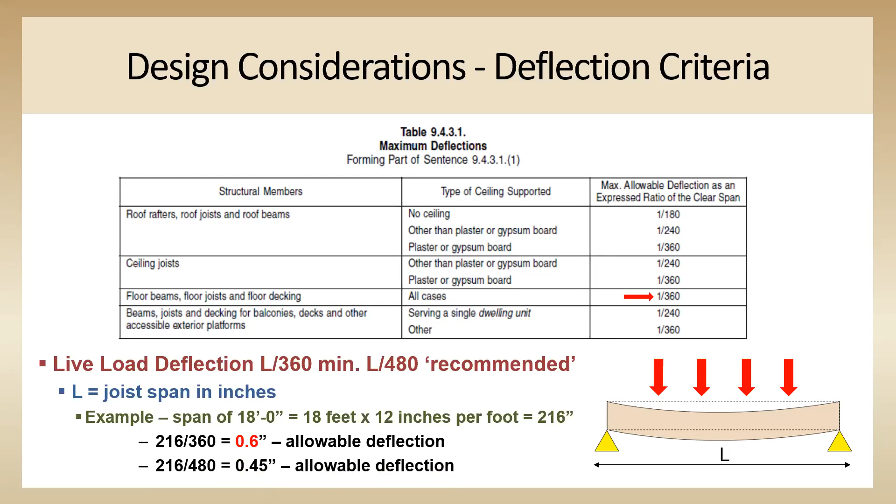All right, let's talk a little bit about subfloor thicknesses and span ratings. APA members produce a variety of subfloor thicknesses. The first one I want to talk about is 19/32 or 5/8, and generally those come with a span rating of 20, meaning no joists can exceed 20 inches on center under that panel.

As a general rule of thumb, and this is my personal opinion, I don't like to exceed or approach the maximum span rating. So I would never go 19.2 under this particular panel. I would always kick it back to 16 on center max under this panel.

What about a 23/32 or 3/4 subfloor? You'll notice the span rating is increased on these panels naturally to 24. In this case, my own personal opinion, I would not exceed 19.2 inches on center spacing of my joists under this panel, even though it is rated for 24. But again, I never like to really reach that maximum or test those boundaries.

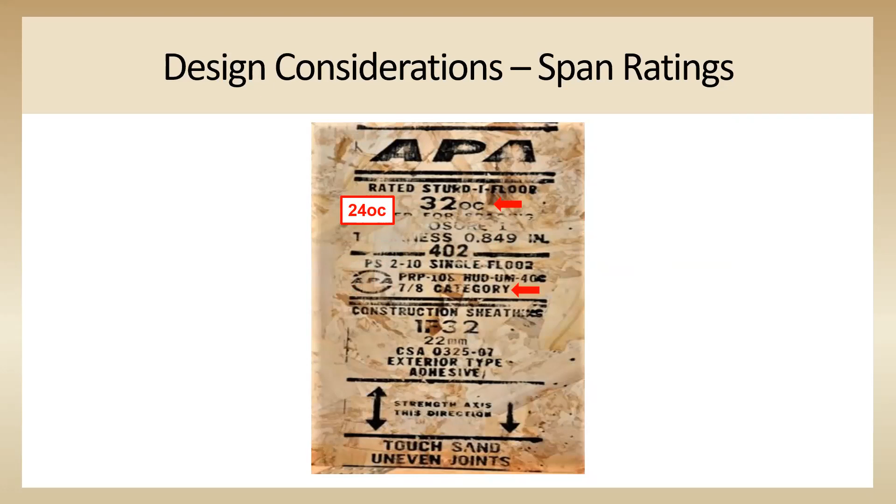Another popular subfloor thickness our members produce is the 7/8 category. You'll notice some come with a span rating of 32, but some come with a span rating of 24. It's really important, when specifying the subfloor thickness, to also specify the span rating. If you're looking to go 24 on center with your joists and you get a 7/8 subfloor panel with a span rating of 24, you're testing the limits. So if you want to go 24 on center, make sure that 7/8 subfloor has a 32 span rating.

All right, let's move back to some design tips. We can utilize engineered wood products in long lengths for continuous spans. Engineered wood products are available in long lengths, up to 60 feet, depending on your local supplier. But I've seen many cases where 40 to 45 feet were readily available. So utilize those long continuous spans.

Look to add load-bearing walls or drop beams at room separations, and try to avoid flush beams. When you're looking at drop beams and continuous spans for I-joists, try to balance the span on either side as much as possible. You want to avoid situations where you have, say, an 18-foot span on one side and 2 feet on the other—that's when you get a lot of uplift conditions. We'll show you an example in the coming slide where that may occur.

Obviously, in order to take advantage of continuous spans, we want to try to avoid flush beams wherever possible. We know this isn't always possible or the case, that we can't always avoid them. So when we do have flush beams, just remember you're not going to be able to do a continuous span.

You're also going to be very limited with regards to HVAC and mechanicals, because up until recently you were very limited with the allowable holes in LVL beams. You were limited to the middle third of the span and middle third of the depth of the beam, and the maximum hole size would be 2-inch diameter.

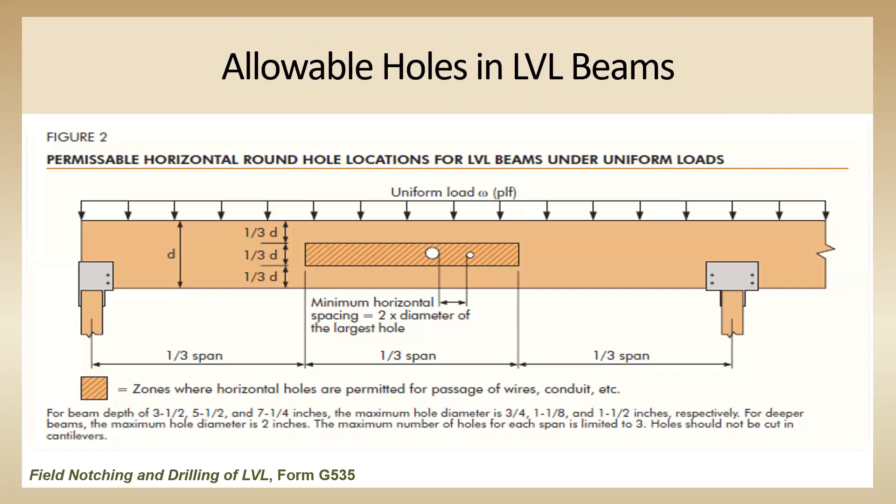Very, very limiting. And I say up until recently because, I guess it was about a year ago, just under a year, we released this technical note. It's available on our website, and it discusses large diameter holes in LVL beams. Using these formulas, engineers could potentially size a hole that's 2/3 the depth of the beam.

So let's say you have an 11 7/8 LVL beam. You could potentially get a 7 to 7.5 inch diameter hole in that beam. But again, it depends on the span and loading conditions of that beam. That beam may have worked as a 2-ply, but now that you want to put that hole in it, it's got to be a 3 or a 4.

So this isn't something that can be done on site. It's got to be done by an engineer. And these are the formulas that will be referenced in this guide for engineers to use when sizing holes larger than 2 inches in LVL beams.

For I-joists, the maximum allowable hole size is inversely proportional to the shear force. The shear force reaches its maximum near the supports. So if we draw a line from the top center of the web to the bottom of the web, just above the support, we will have drawn a line that represents the inverse of the shear force. The height of the line at any given point approximates the permitted hole size at that location. Just remember that all holes should be centered in that web.

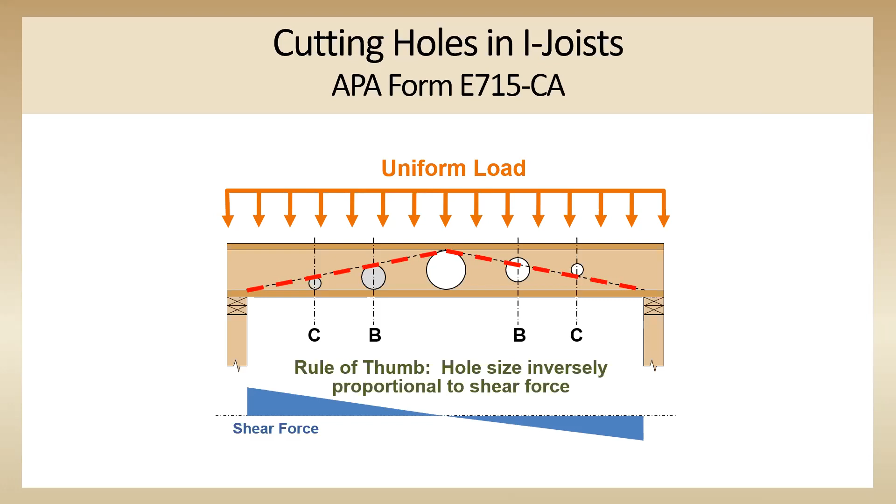Okay, let's get back to some tips here. When we're looking at our floor systems, we look at offset loads. We try to eliminate those as much as possible. These are loads coming down from girder trusses or from flush or drop beams. Follow those loads down, where are they falling? Try to eliminate those offset loads, and I'll give you an example in the coming slides.

We also want to identify plumbing and HVAC interferences. You could have a really efficient floor system layout, but it just doesn't jive with the HVAC. So these need to be incorporated into this process.

Most of us are aware that mixing engineered wood products with dimension lumber products only leads to headaches and issues. This is because I-joist depths and engineered wood product depths are not the same as conventional lumber. You get a 2x10 that is 9 1/4, and you get a 9.5 inch I-joist. So they just don't jive. Don't use them together in flush conditions.

And then avoid changing the joist direction as much as possible. When you change the joist direction, I've seen it many times, it can create a hump in that floor system. What else does it do? It may actually impede HVAC, plumbing, and electrical runs. So trying to keep everything running, the joists in the same direction, is very advantageous.

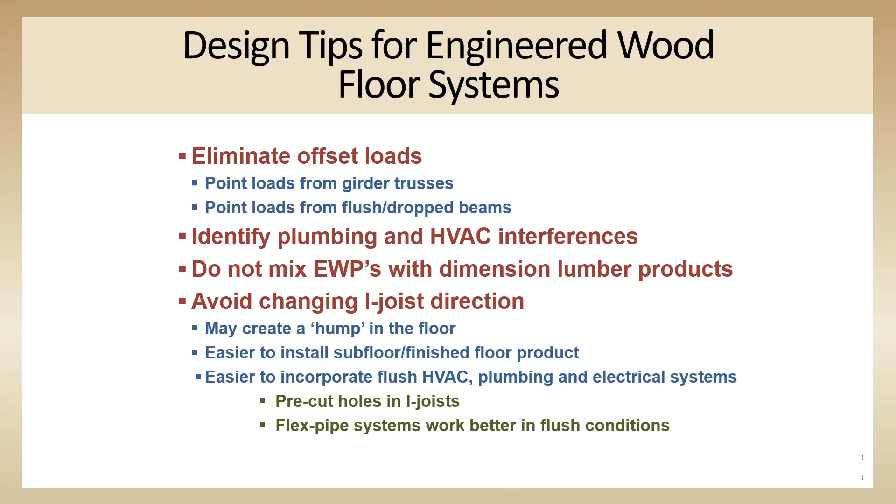So those are some design tips and tricks, really quickly. When you apply these early in the process, like the preliminary stages, is the best time. As I said, this could really change the design. So you don't want to be doing this after you apply for permit. Let's go through some examples right now, really quickly, before we get into walls.

And this is the first one I want to pull up here. You'll notice right away under the great room, we've got a 9.5 inch joist trying to span a 17-foot simple span. When I look at a span table for simple span joists, I can see that I can't even get a 9.5 inch joist to go 17 feet. So I'm instantly going up to an 11 7/8, and I've circled some options there that will achieve that span.

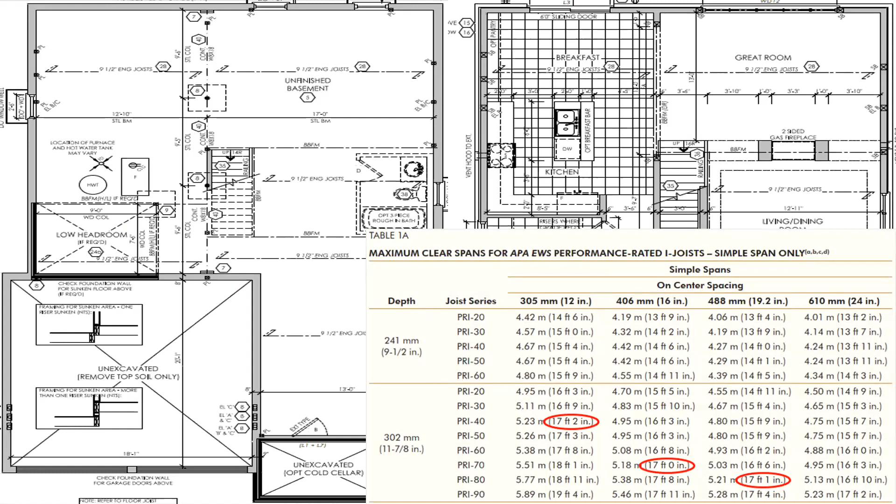But I don't like simple spans. I like continuous spans. So if I were to look at this and apply some of those value engineering tips and tricks we learned, what do we get?

We want to stack our loads because we want to avoid having point loads in the mid-span of a beam. Those point loads are going to make me upsize that beam. So if I simply change where those posts and pads are in the basement and align them with above, I eliminate those offset loads, and now I can probably use a wood beam in the basement instead of steel. So aligning your loads and taking this into consideration can really greatly impact the sizing of the members you're going to need.

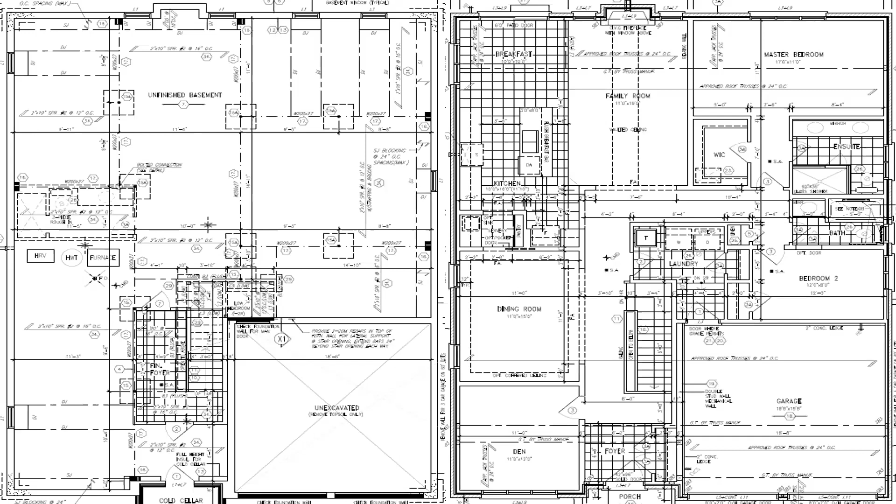Some of you may be saying, yeah, but originally you were doing this floor at 2x10s. Now you're going 11 7/8. That's going to change the stairs, that's going to add another row of brick to the outside. This is true. However, we were also able to eliminate 3 posts, 3 pads, and 55 lineal feet of steel. So you've got to do that comparison now. And suddenly the 11 7/8 floor system doesn't seem so bad after all. Plus, it's going to be a really good performing floor.

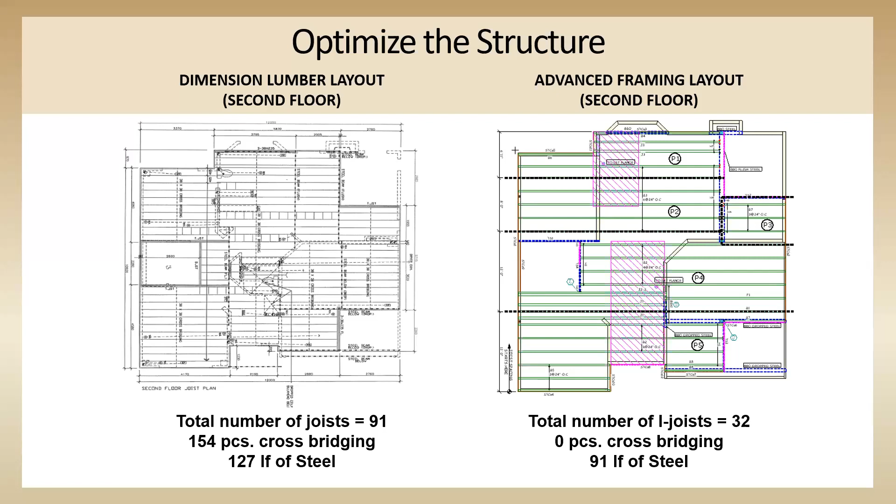I've actually done some designs, so I want to show you all the potential. Have a look at this second floor framing system that was value engineered, and just look at the total number of joists on the bottom. Went from 91 to 32. We eliminated all the cross bridging, and we reduced the lineal foot of steel in this floor. So it's going to be a lot easier to build too, and your labor is going to be cheaper too.

So I'm going to keep moving along here. If anybody has questions related to floor systems, we may have some time at the end of the session, but I packed a lot of info in today.

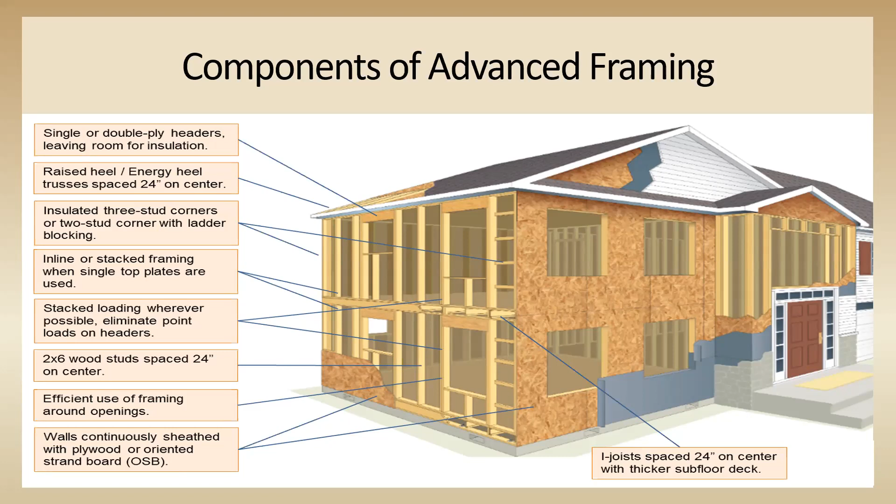We're going to look at some of these details today, but not all of them. I'm only going to focus on the ones required by building code. APA has a great publication, a construction guide that's 24 pages, describing most advanced framing techniques in detail. These details aren't clearly illustrated in the building code, which poses a challenge sometimes to designers attempting to incorporate them into their projects. We hope this guide will help answer some of those questions and provide details.

Okay, let's focus on some of those details. When we look at two walls, one maybe conventionally framed and one advanced framed, we can really see the difference. Anything in yellow is being removed, which means we can have more room for insulation, boosting the effective R-value of our wall assembly.

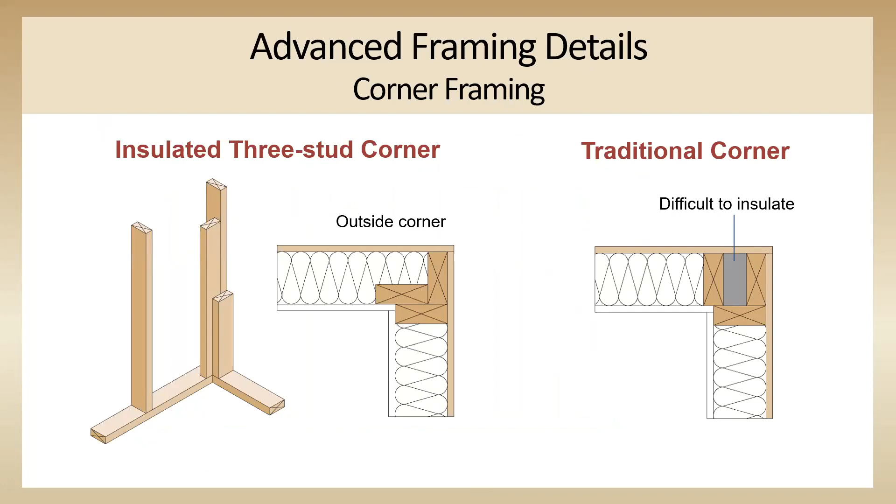Well, you could use ladder blocking, as you can see in this detail. This is a great advanced framing detail because it utilizes cutoff material that you've already paid for. It's sitting on the site now, cut off—now you have to pay someone to pick it up, throw it in a bin, and pay someone to take that bin to the dump. You could use a lot of this material in areas like corners for ladder blocking, as well as ladder junctions where interior walls butt up against exterior walls. The 2x ladder blocking there will allow full depth insulation at this junction, slightly compressed at the block, helping improve the thermal performance of that wall system.

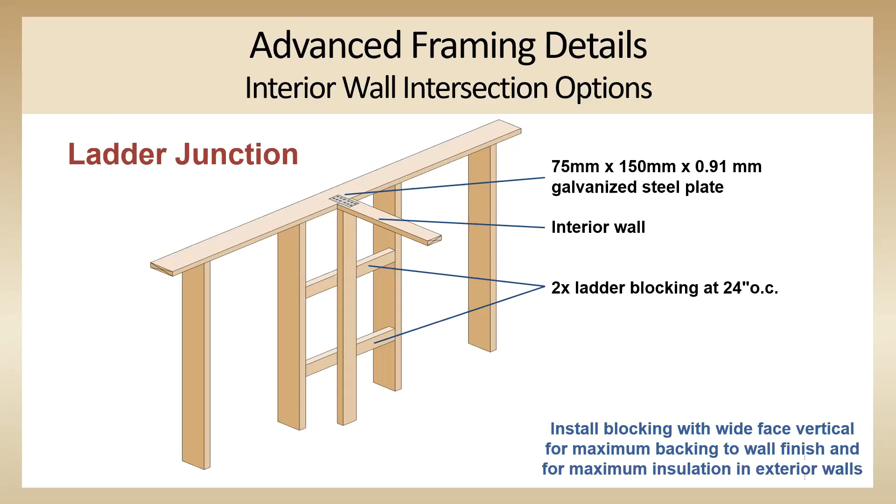I mentioned it before—right sizing our headers. This is a big one. I go on sites all the time and see 3-ply 2x10s even though it's only supporting a gable truss with no point load. So right size your headers. This will allow insulation to be put into that cavity, helping increase the thermal resistance of that wall.

Or why not use my favorite detail, and that is to actually push that header right up into the floor system if you can do that. Again, this will allow full depth insulation around that opening. You could potentially use a double rim board, depending on the amount of load, but it's limited to a 4-foot maximum span. So if you have anything over that, or if your load doesn't allow it, you could incorporate an LSL or LVL up against the rim board and just hang the joists off it.

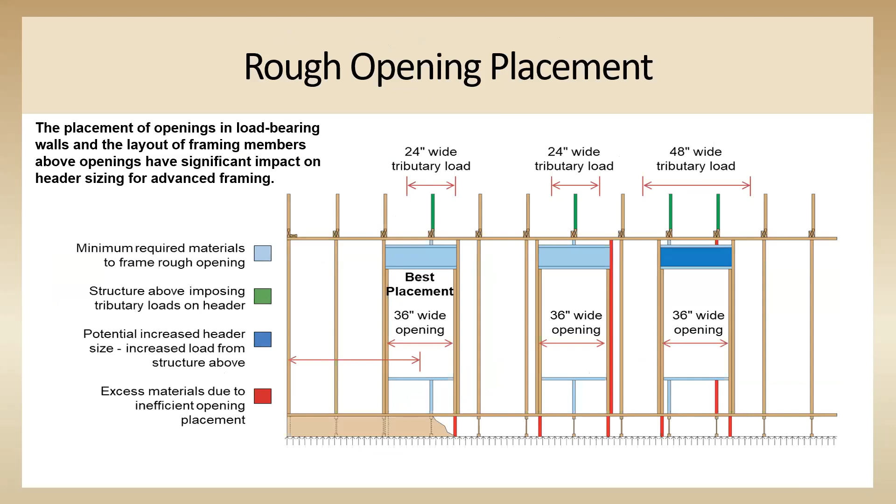So I mentioned just paying attention to your point loads. If you have a girder truss sitting on a header, that header has to be sized appropriately. Maybe if you can change the location of that girder truss slightly, or change the location of that window, or a combination of the two, you can avoid that direct contact and size a smaller header, allowing for more insulation in that wall. Again, this is all the concept of advanced framing—trying to get more insulation into that wall.

Here's a detail worth mentioning, though it's not required. Single top plates are not an advanced framing requirement in Canada. I'm kind of glad it's not, because it's very limiting. All of your framing members must line up - your roof trusses must line up with your wall studs, which must line up with your floor trusses. And we all know there's hardly any situation where everything lines up.

What if I want to go 24 on center with my trusses? Then I have to go 24 on center with my wall studs, and then 24 on center with my floor trusses or joists. I can't always do that. So stick with a double top plate - that's what I recommend. Now you have no maximum offset. Your roof trusses could be at 24 on center, your wall studs at 19.2, and your floor joists at 16. Double top plates are highly recommended.

So we looked at some of those details. There aren't really that many, but they have a big impact when you compare walls with and without advanced framing - that's what we're comparing here. There's a couple of walls, one that does not have advanced framing and one that does, and you can see how it boosts the effective R value of that wall.

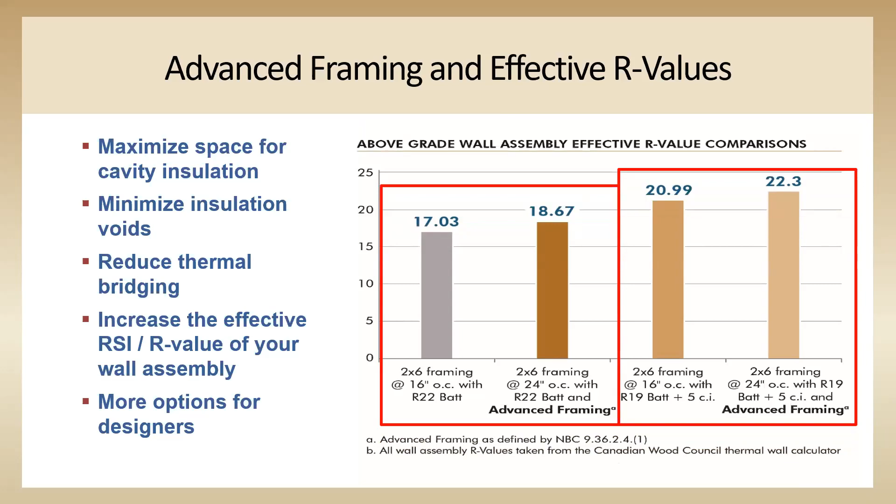So why am I stressing effective R values so much? Well, when you look at SB 12 in the building code, the different compliance packages, you have the option of meeting a nominal requirement or a minimum effective R value. Aha, you see where I'm going with this now. Let's have a look at package A1, for example. Here's your nominal requirement, or you can meet an effective R value target of 17.03.

So now let's look at some advanced frame walls that can meet some effective R values. For the first set of examples, no advanced framing - all I'm doing is changing the on-center spacing of my studs, going 24 and 19.2, and you can see how it boosts the effective R value of that assembly.

Let's say I go full advanced framing and change the on-center spacing of my studs. Now you can see the full potential. What nominally required an R22 batt, now I can get away with an R19. I'm using fewer studs, my labor is cheaper, the wall feels better, and I'm using a lower grade of insulation. This is savings all around and better performance.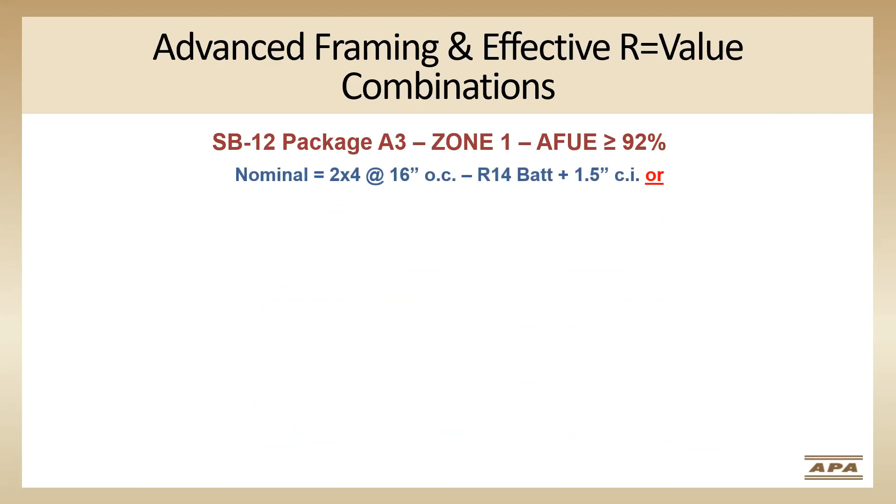Last one we'll look at really quickly - I really like this one, it's a good example. Package A3. Here's your nominal requirement, a 2x4 wall for the nominal: R14 plus 1.5 inches of continuous, or an effective R value of 18.62. Again, just want to change the on-center spacing of my studs - here's an option. I can actually just use a 2x6 stud with an R24 and eliminate that 1.5 inches altogether. And then you have some full-blown advanced framing options as well - you can see here I can get a 2x6 wall at 24 on center with R22 bat to work.

Let's move on. A lot of builders are looking at Energy Star programs, pretty popular. And again here too, we can meet an effective R value target, and there are advanced framing options for even the Energy Star Zone 1 packages. So again, just keep this in mind - a lot more options when you look at advanced framing.

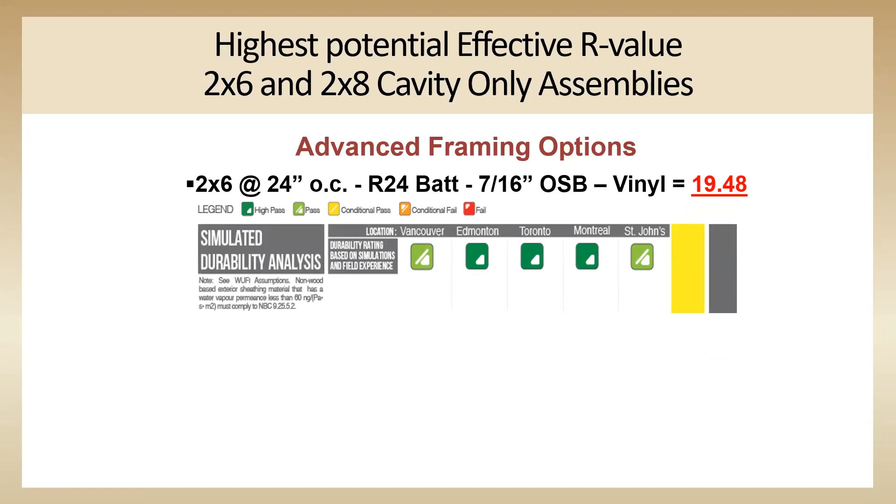I wanted to know what's the maximum effective R value that I can get out of a 2x6 wall, as well as a 2x8 wall, cavity only, without using any exterior continuous insulation. So here we go. We can get a 19.48 effective R value out of a 2x6 wall, that's the max without continuous insulation. And with a 2x8 wall, here's the max, 23. So pretty high without even having to put any continuous insulation on that cavity. We'll talk about some of the advantages that come with that.

I also want to touch base a little bit on programs like EnerGuide. They require a performance-based design approach. But here too, advanced framing details can be used to increase the trade-off options for designers and builders. So these advanced framing techniques offer a lot of options with the prescriptive path as well as the performance path.

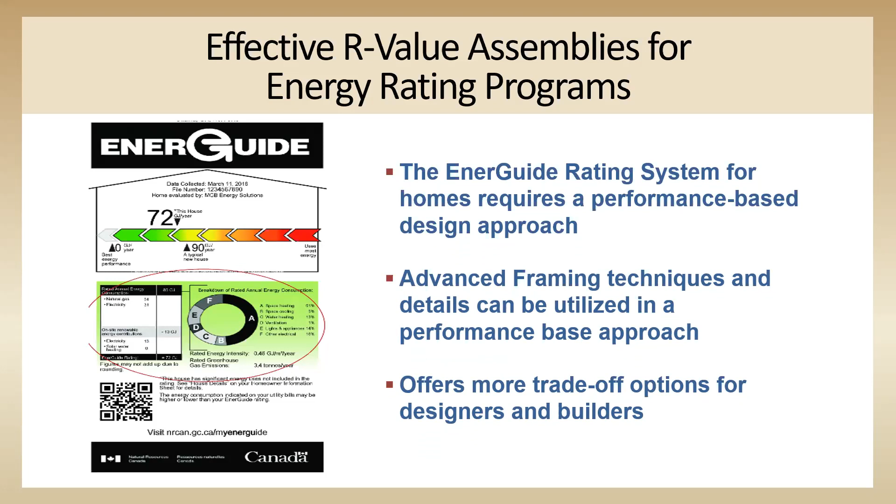I just want to highlight table 9.36.2.41A out of the National Building Code, because I'm always asked, well, I need to know the framing factor for advanced frame walls. Well, here they are. Note that I can have an advanced frame wall with studs spaced at 16 inches on center, 19.2, or 24. So the stud spacing is separate from advanced framing, okay? I can have an advanced frame wall with studs at 16 on center. They don't need to be at 24 on center in order to comply with advanced framing.

What you do need to comply with advanced framing are the following details, as defined underneath in the footnotes of that table we just looked at: insulated or flush headers, corners with 2 studs, ladder blocking at T intersections. It says no cripple or jack studs, but I just say efficient use of framing around openings. We're going to dig into this a little bit internally. And then double top plates, so you don't need to have a single top plate. So those are the advanced framing details required by the National Building Code.

Any builders that are like, okay, well, maybe I want to start exploring some advanced frame walls, are there any tools out there that will help me do this? Yes. The Canadian Wood Council has an excellent tool called the Effective R Value Calculator. It's available for free on their website. It's got over 10,000 assemblies in it. You choose the wall assembly components, and it spits out a report that tells you what's the effective R value without advanced framing and with advanced framing. So it's a really great tool, and it gives you a little report on each wall.

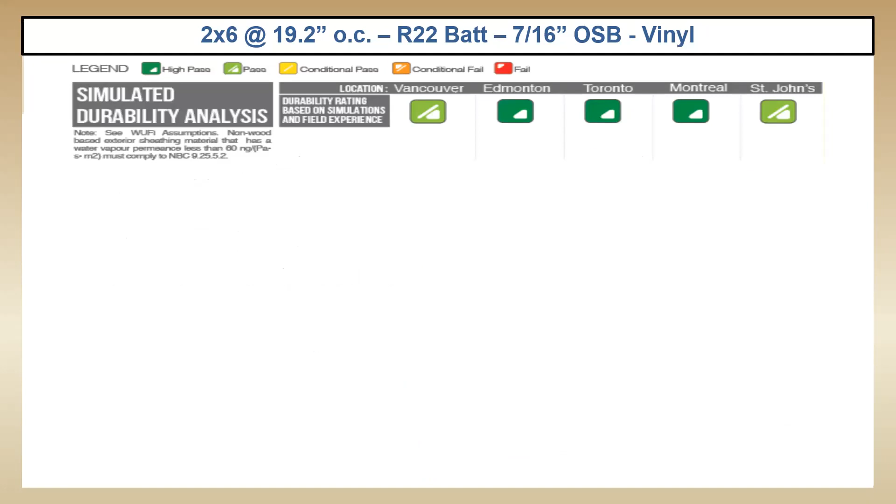For example, a 2x6 wall at 19.2 on center with R22 batt insulation, 7/16 OSB and vinyl, look at the color coordination. It'll say, okay, this wall, if you were to build it in any location here, like Vancouver, and all these locations across Canada, this wall performs well. But when you start adding continuous insulation to the exterior of the assembly, you'll note you start to see different colors. They're yellow now, not green anymore. You're getting a conditional pass, it's a warning. You're also seeing a red in Edmonton because we have not met the inboard-outboard ratio. In order to comply, we need to increase the exterior insulation thickness to 1.5 inches.

Now you can see we eliminated the red, but we still have those yellow warnings. Now, what is it saying? Let's get into that. But first, for those of you wondering about the inboard-outboard ratio compliance, table 9.25.5.2 is what you need to look at.

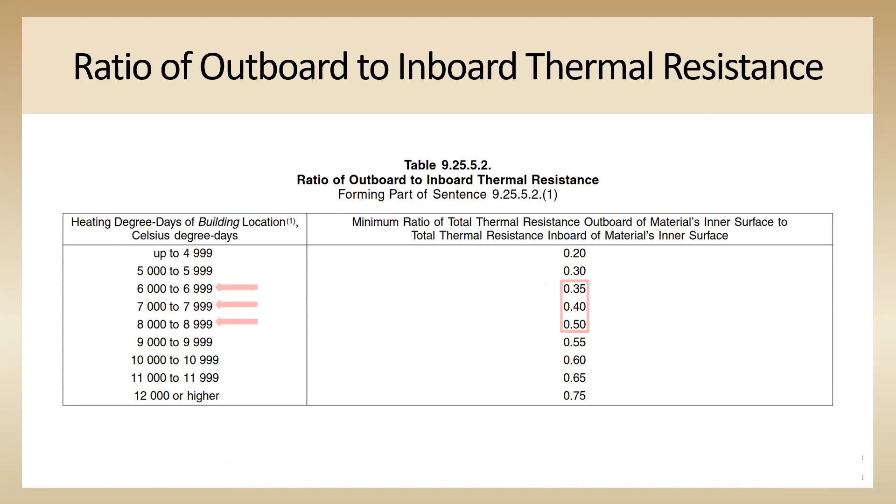One very important factor to consider when selecting wall assemblies, and I can't stress this enough, is the drying potential of that wall. When leaks happen, and they likely will, how will the assembly dry? If bulk water is able to penetrate the assembly through improper window or door flashing details or improperly sealed penetrations, where will it go? Wall assemblies with low permeance materials on the inside, like poly/vapor barrier, and low permeance materials on the outside, need special attention when it comes to window and door flashing details to prevent any bulk water intrusion from entering the assembly.

One unique feature of wood structural panels, like plywood or OSB, is that when the relative humidity rises, so too does the permeability of those materials, allowing any moisture within the cavity to dry to the exterior. But this is only true when there are no low permeability materials blocking that process.

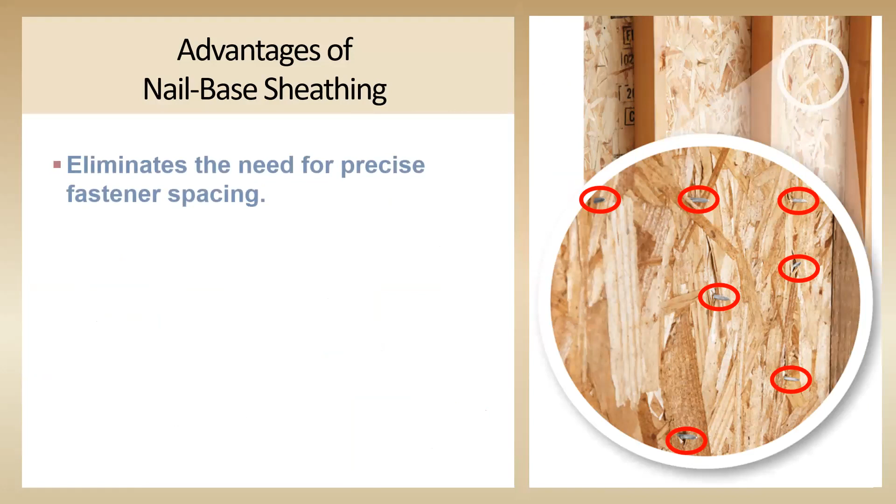Without OSB or plywood to act as a nail base, the siding, along with any mechanical or electrical services, as well as wide exterior trim, will need to be fastened directly to the studs, which may limit them to a maximum 16 inches on center spacing, which, as we've learned, is not very good for advanced framing.

When it comes to fastening recommendations when using OSB or plywood as a nail base for your siding and trim, APA's nail-base sheathing for siding and trim attachment construction guide, provides an easy method for determining the type and spacing of siding fasteners to satisfy building code requirements when using wood structural panel sheathing as a nail base for cladding materials that have weights up to 3 PSF. This includes wood lap and panel siding, vinyl siding, fiber cement, wood shingles and shakes, synthetic stucco, and other popular cladding materials.

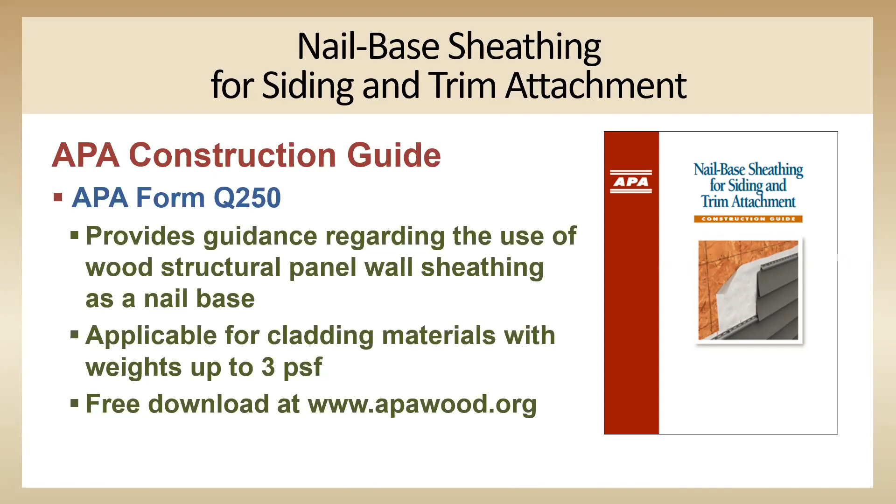Depending on the fastener type and the performance category of the wall sheathing, you'll find the recommended fastener substitution schedule. Just want to note that when using ring shank nails or wood screws, the fastener substitution schedule is 1-to-1, versus smooth or screw shank nails, which may require the use of additional fasteners. So it's really important what type of fastener is being used if you're trying to utilize OSB or plywood as a nail base.

This benefit was put to the test by the Insurance Institute for Business and Home Safety, and the results are clear: siding attached directly to continuously sheathed plywood or OSB walls is able to withstand the same wind and weather conditions as siding directly attached to framing. In fact, siding need not be attached to any framing members at all, so long as the fasteners fully penetrate the sheathing by a minimum of 1/4 inch, and the correct fastening schedule is followed. This is also true even when siding is attached to plywood or OSB through a layer of non-structural continuous insulation up to 2 inches in thickness.

As you can see, even after the roof system completely failed due to a high wind force, the siding remained intact. This is true even through a layer of continuous insulation up to 2 inches. Or you can just nail it directly to the OSB or plywood as shown here.

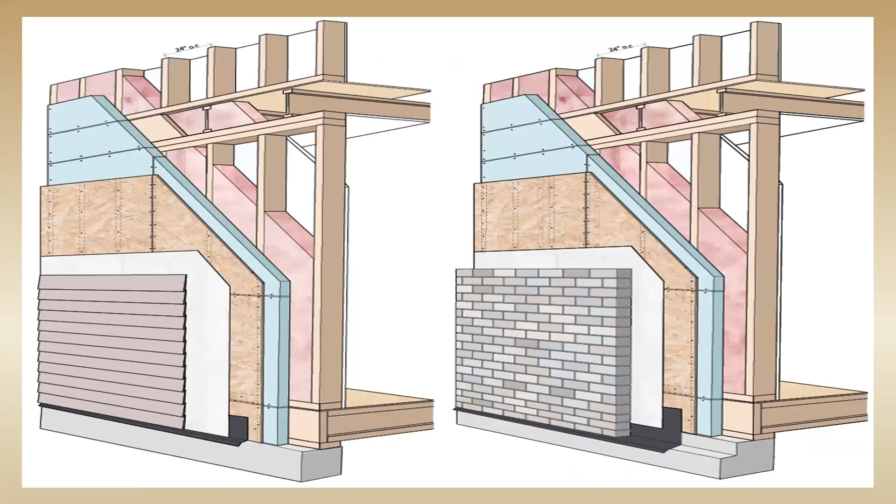Now, if the weight of the cladding materials exceeds 3 PSF, we have a technical topic which discusses fastening requirements for cladding materials with weights up to 11 PSF. However, this only applies when cladding materials are attached directly to the wood structural panel wall sheathing—you can't go through a layer of foam.

We can use advanced framing details to help reduce lumber, labor, and installation costs. We can use plywood or OSB to act as a nail base for our cladding attachment when studs are spaced greater than 16 inches on center. But are there any other advantages or benefits that come with OSB or plywood wall sheathing? Can anyone think of any?

Some people in Barrie may, after last year's storm. They help increase the resiliency of our structures by eliminating the risks associated with insufficient bracing. And you're going to get a kick out of some of these images I'm about to share. What do we need bracing for? Well, during a high wind event, lateral forces push on one side of a structure and pull on the other side, while at the same time uplift forces attempt to pull the roof away from the structure. So we need to design our buildings with walls strong enough to resist these types of forces.

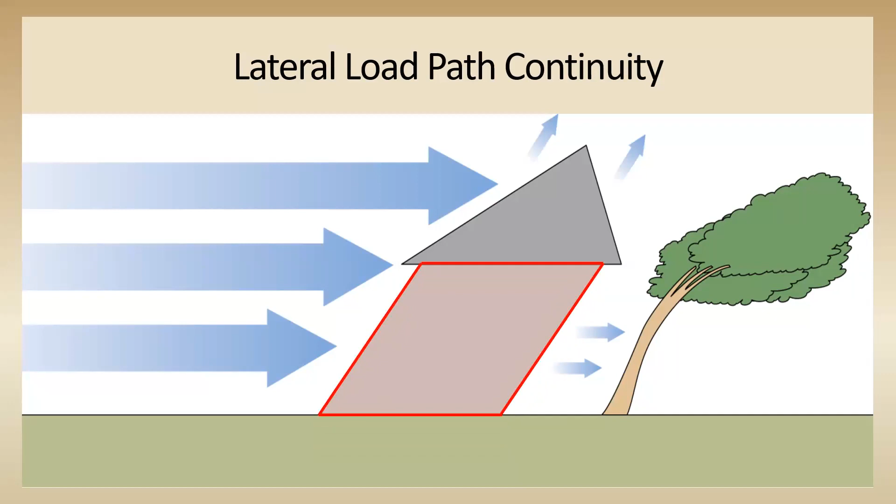Now some of you might be saying, well, I don't see these diagonal 2x4s, I see diagonal metal let-in bracing. Well, we don't have any test results for metal diagonal bracing, but we would assume they're going to be less than the 2x4 diagonal. That's all I can say.

This might be why temporary wood bracing is being installed on job sites in addition to metal diagonal bracing, in order to keep things square during construction. But what happens when HVAC, plumbing, and electrical trades come in to do their work? They want to remove all that temporary bracing because they can't get around, right? They need it all out so they can actually do their job. When they remove it, this is when the homes are most susceptible to failure, because they don't have interior gypsum and they don't have any structural sheathing on the exterior.

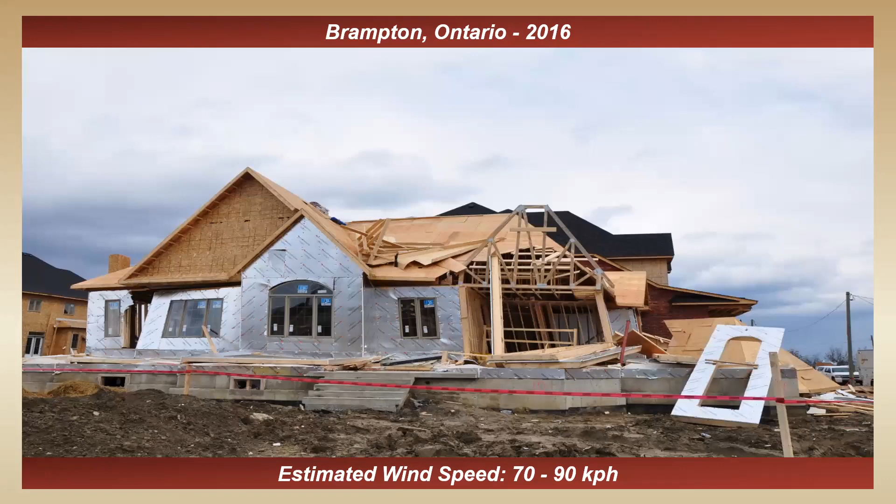I don't know if you consider 70 to 90 kilometers an hour a high wind event. It doesn't even make the Fujita scale, it's not even an EF0. But we're getting failures, we're seeing a lot of failures actually, and we're seeing consistency in these failures, right?

Here's another example of some homes up in Brampton. No interior gypsum had been installed yet, and only foam and plastic insulation was installed on the outside. I don't know if there was any diagonal bracing or not, I can't confirm it on these ones. But you can see what's happening, right? And obviously it's non-structural sheathing, it's not able to resist these forces, and these homes are collapsing.

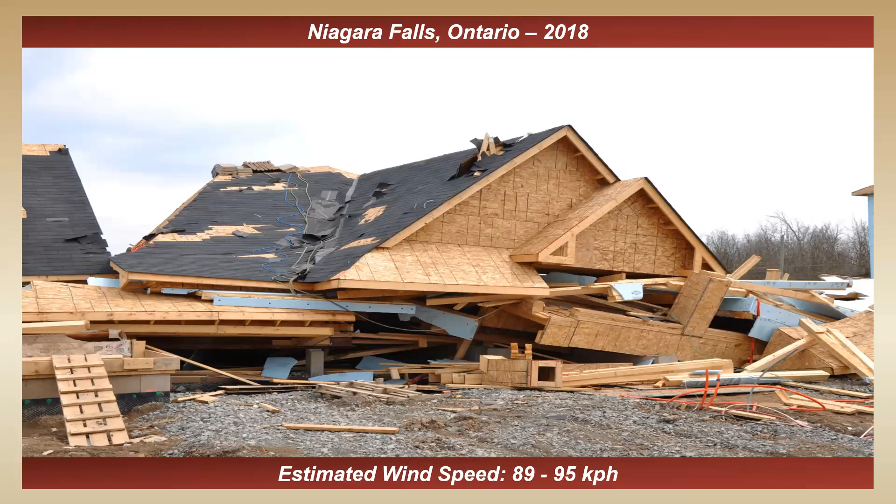This is happening in Niagara Falls too. I can keep going. Just pay attention to the wind speeds, they're really not that high. It's pretty alarming.

Now, I want to show you this next one, it actually caught my attention. Usually you'd see failures where it's kind of like dominoes - one house that's more exposed gets pushed over and causes the others to topple. But in this case it was a different situation. You can see they didn't fall like dominoes. Actually, the roofs fell perfectly, almost in line with the foundation perimeter. This tells me the ground floor walls failed instantaneously, very quickly.

And kind of a scary thought for any trades or inspectors that are inside the home when this happened. It happened very quickly. So just be careful out there nowadays.

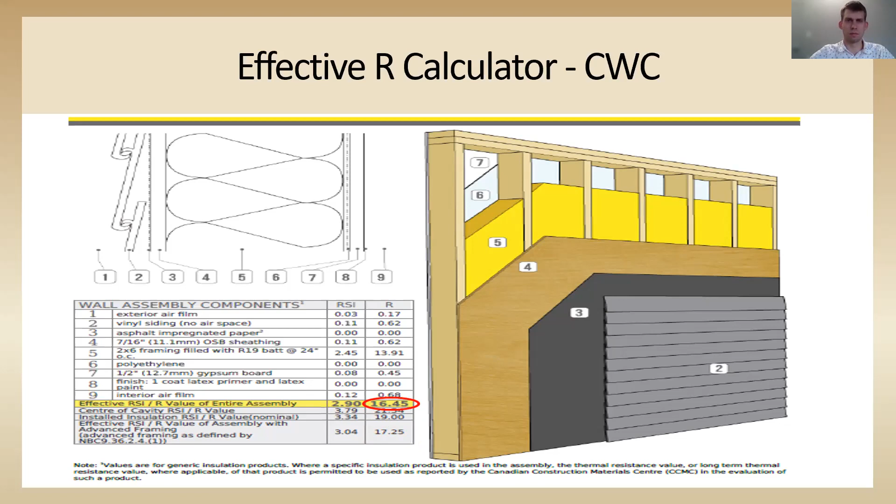And if you're having some issues with this and you want to walk through it quickly, shoot me an email and I would be happy to log in with you and we can walk through it together through Teams or something, happy to do that. I'll try to get to the last page here again so you all have my contact information. Whoops, I went a little too far. Okay.

Yeah, so have a look. There's over 10,000 assemblies in the database, so when you log in to the effective R calculator, you'll have to go through and choose the assembly components you desire. And then you'll get a list of wall assemblies that match those components, and you can filter through that. But I'm happy to walk through it with you if you need.

Any other questions? Thanks, Corey. I'm not seeing anything else here.

Yeah, thank you, Corey, for your presentation here today with that information. That was very informative, and some very good benefits there when trying to incorporate advanced framing into standard construction world and practices today. Especially with trying to reduce cost, everyone's aware of the price of materials, and anytime that we can try and save, whether it's a piece of 2x4 or 2x6 in a house, that's savings back to the builder while still remaining code compliant.